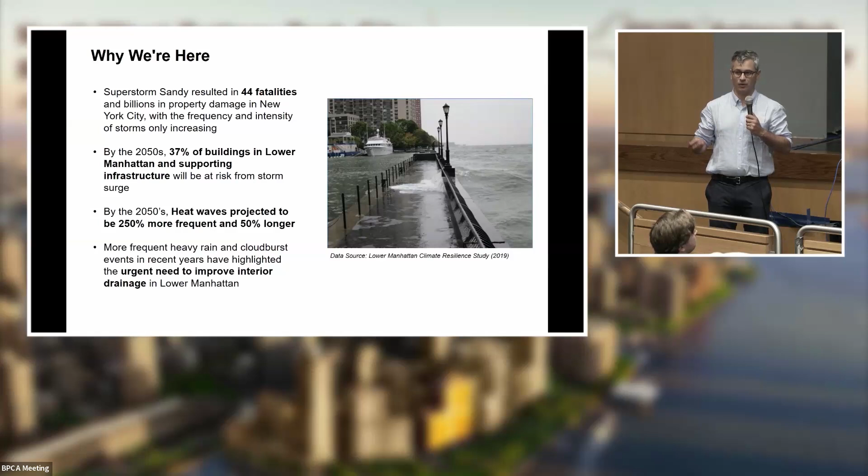So why are we here? I think most of you are pretty familiar with the recent history, but it's always important to frame this conversation with the urgency of the challenges we face. Everybody remembers Sandy quite well, but the risks are only growing, and we can see this with the wildfires last summer, with the heat today, with the heat around the world. Climate change is here. It's very real. It's impacting Lower Manhattan as we speak. We have to struggle to adapt, and not only adapt to climate change, but try to build a better neighborhood in the process. That's what we're all trying to set out to do today. And we also have to think about it not only in terms of sea level rise, but in terms of rain and extreme heat as other important factors in adaptation.

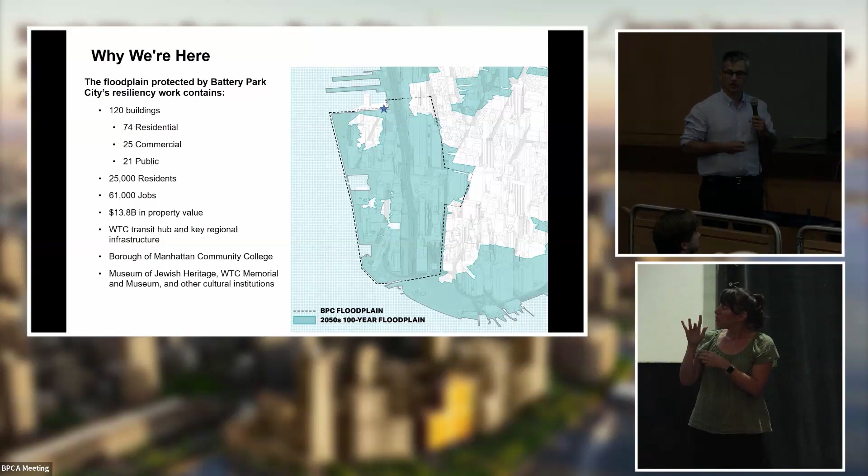So here's the snapshot of where we are today and what this plan hopes to address. You can see, with the numbers on the left of the screen, the number of residents here in Battery Park City, but also just east in Tribeca, 25,000 people, a significant collection of really important institutional stakeholders like the Borough of Manhattan Community College, the World Trade Center, the collection of buildings and the transportation underneath it, the Museum of Jewish Heritage, and on. So it's a hugely important part of the city's economy with an incredibly important collection of institutions we're hoping to protect. And it comes in the broader context of this effort that the city is undertaking, to look at Lower Manhattan as a connected set of coastal resiliency efforts.

I wanted to give a moment here for Jordan Salinger, who works for the Mayor's Office of Climate and Environmental Justice. I want to flatter Jordan for a second before he gets up to say that I think there are few people who have done more to protect Lower Manhattan's coastline than Jordan. He's one of the unsung heroes of resiliency work in the city. So I wanted to sing his praises and give a little more context on what the city's doing. Jordan, you want to say a few words? Let's give Jordan a round of applause.

Well, certainly the first time 'hero' has been in any introduction of myself, so I'll take it. Hi everyone, Jordan Salinger, Mayor's Office of Climate and Environmental Justice. As described, this is a partnership we've had with Battery Park City Authority for the better part of the last decade. Certainly planning efforts came after Hurricane Sandy, but in earnest really 2016 and on, working together on these projects. One quick note to explain the slides here.

Ignoring East Side Coastal Resilience, which on its own is a $1.5 billion project, everything below there is roughly $1.7 billion worth of capital projects in construction—roughly half of these efforts. The Brooklyn Bridge to Montgomery Coastal Resilience broke ground about a year and a half ago. More recently, the Battery Coastal Resilience, and obviously the work the Authority has done on the South project. So once again, $1.7 billion of funded capital projects. There is more to be done.

You can see the call-out there for FiDi and Seaport Climate Resilience. That is a more complicated effort we are undergoing, but something we've made steady progress on. I want to take a moment to focus on the collaboration with the Authority. There's nowhere else in the city where you have all these projects abutting each other. They all work independently and can advance independently, but for example, there's one drainage system. So it does require all of us working together, and they've been great partners, with the same design standards across the projects—that's no easy feat.

Also want to take a moment to thank all of you for coming on such a warm evening. There could be plenty of other places outside, but once again, the AC does seem pretty nice.

These efforts are not easy. They are long-term infrastructure projects. They involve real back and forth. There's no easy design solution, and like any infrastructure projects, they don't happen overnight. These are projects that will take a while to construct, but future generations will truly benefit from those efforts. That is not always easy in forums like this, but I appreciate all of you having the conversations and trying to make these projects better, because one thing we've seen over the last decade is conversations like these have led to better projects. So once again, thank you for having me.

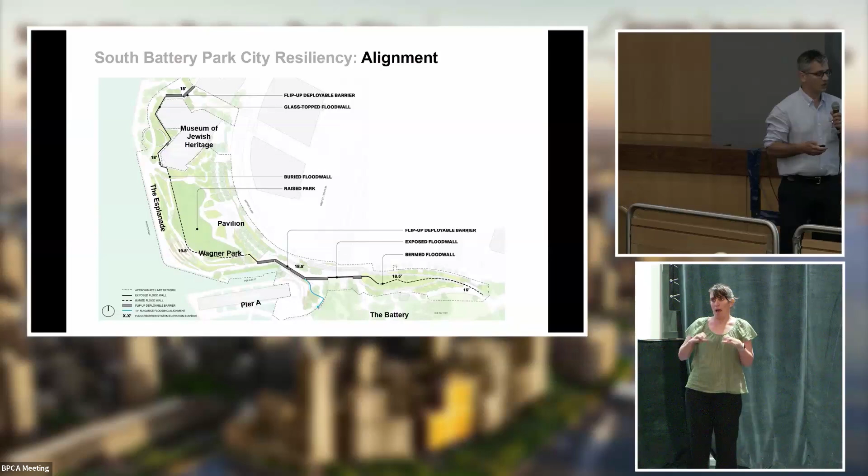This is the effort underway in the southern end of the neighborhood, as Jordan alluded to, stretching from the Museum of Jewish Heritage down through the Battery itself. If you walk by this neighborhood, you'll see the active construction happening. We've got some images here showing what's happening—you can see the pavilion building in the middle rising.

You can see the below grade work and some of the complicated and interesting engineering happening to really elevate the park and pull it out of the floodplain. We're excited to report that we're continuing to be on budget and on schedule, and by summer of next year, the park will be reopened.

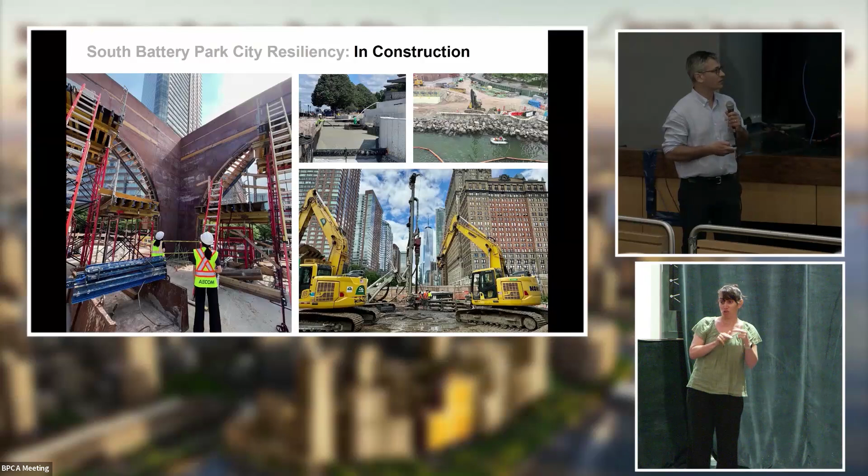Got a couple more images to show you about some of the really interesting and complex construction work that's happening, so hopefully those of you who are engineering and construction nerds can appreciate the level of effort and complexity happening. So that's just a quick update. Next summer, we hope to really celebrate with you all the opening of that park, and it's exciting to see it continue to move forward.

So the meat of the conversation, I'm going to turn over to Gwen Dawson, our Senior Vice President for Design and Construction, who's been admirably leading the Northwest resiliency efforts to talk through our updates to design. As Jordan mentioned, this has really been a great conversation with the community where we've tried to respond to concerns we've received and improve the design. I think you'll see some hopefully improvements in the design, and then also start talking about construction and what the schedule looks like. That's a much longer conversation we'll continue to update the community on, but I want to introduce the overall schedule and timeline so you get a sense of how that might play out. So with that, I'll turn it over to Gwen Dawson.

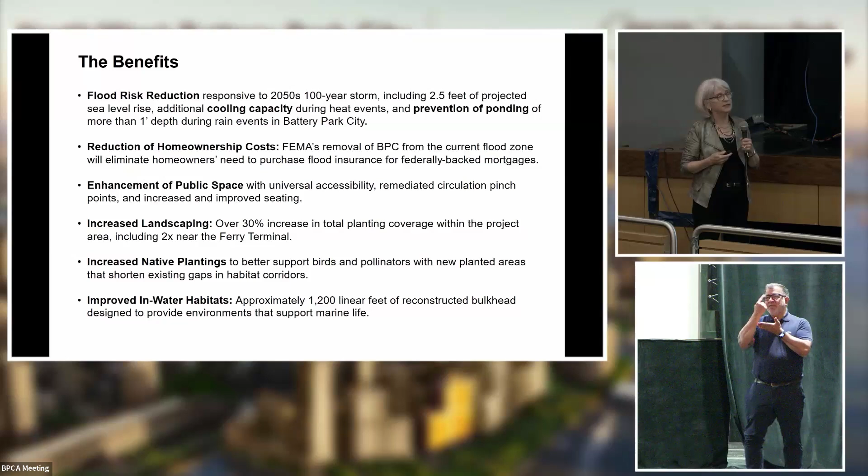Just to touch on some of the benefits, as you know, we are designing this project to be responsive to the 2050s 100-year storm, which includes 2.5 feet of sea level rise. We're also anticipating that it will help provide additional cooling opportunities for heat events, and also drainage advantages which keep the potential ponding and accumulation of water to a minimum in the event of heavy rainfall events.

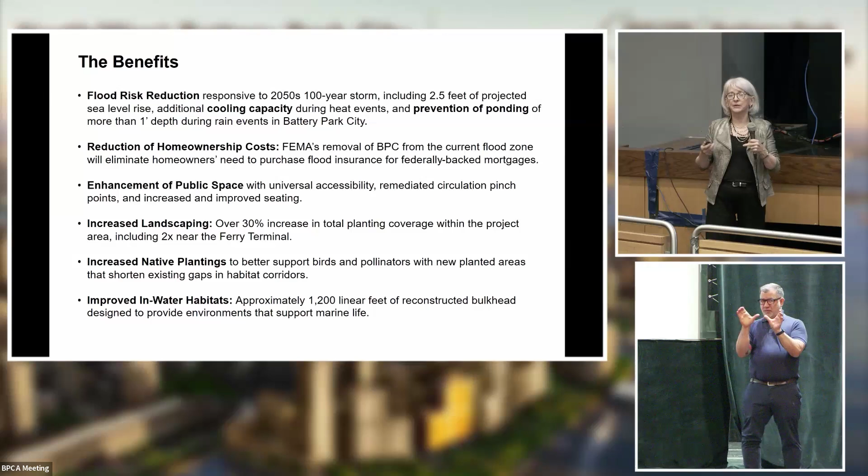We also want to make sure folks keep in mind that there are a number of economic advantages that flow from the project, not the least of which is that with FEMA certification, which is part of the project, the Battery Park City community will be removed from the FEMA flood maps, which eliminates the requirement for flood insurance for federally backed mortgages.

We also have taken every opportunity we have identified to enhance the public spaces as we design the flood barrier system, to increase landscaping -- something we've been very successful at doing, about a 30% increase across the project area in overall landscaping opportunities, increasing native plantings and also in-water habitats.

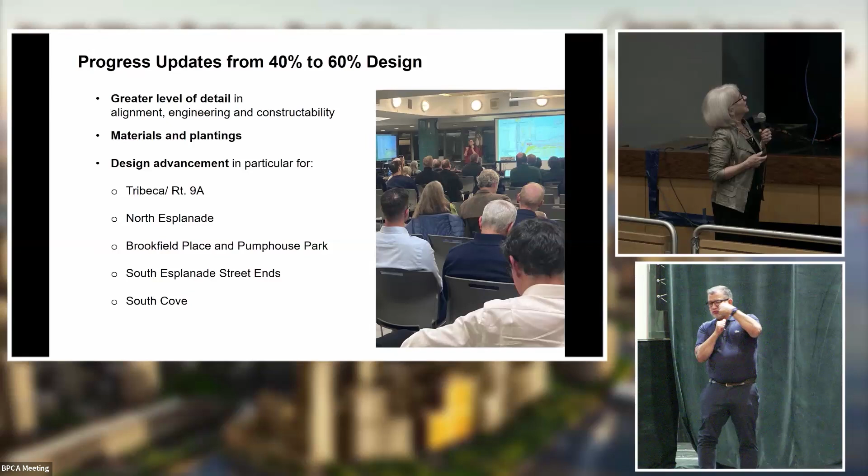Just to give you a summary of some of the design developments that have taken place since the last time we met: we've got a greater level of detail in the alignment, the engineering, and the constructability for the overall project area. We're also focusing a great deal on materials for the finishes and the planting palette. There have been particular advancements in the design for certain portions of the project, including the Tribeca Route 9A section, the North Esplanade, Brookfield Place and Pumphouse Park, South Esplanade Street Ends, and South Cove.

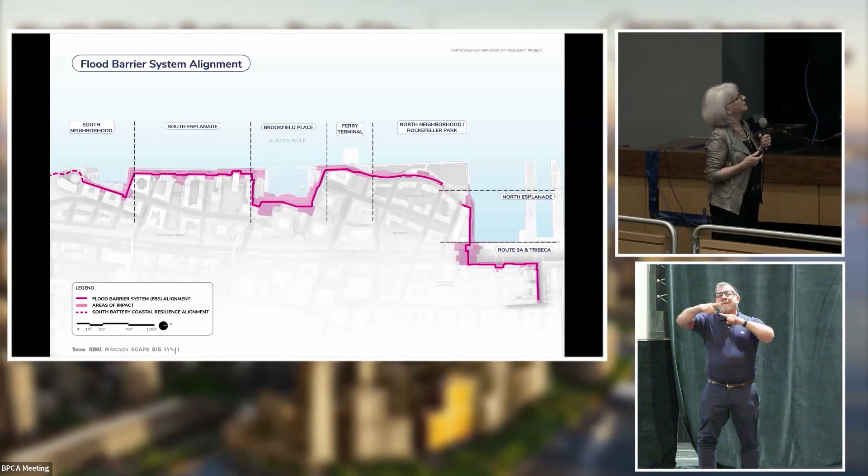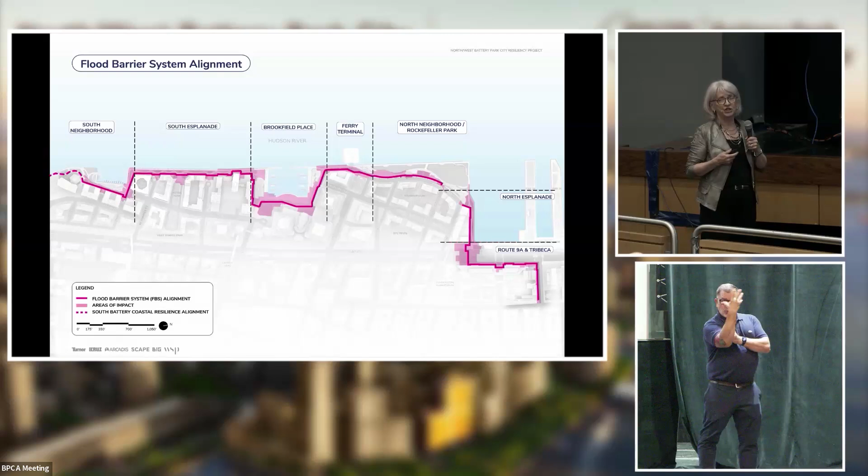To reorient you to the overall project area, it's a very long alignment, over a mile long. This slide is oriented so south is to your left, north is to your right. The project begins on the south end at the end point of the South Battery Park City Resiliency Project around First Place, then proceeds northward along the waterside edge of Battery Park City, across the North Esplanade, and extends across Route 9A, up the east side to North Moore Street, and across to Greenwich Street. We need to go that far, even though it's outside Battery Park City, because in order to achieve the targeted storm protection, or design flood elevation, we have to find a natural spot where the existing topography meets that elevation. There isn't a spot within Battery Park City itself where we could stop the project — we can't do that until we get across Route 9A to Greenwich Street, where the natural topography meets our design flood elevation.

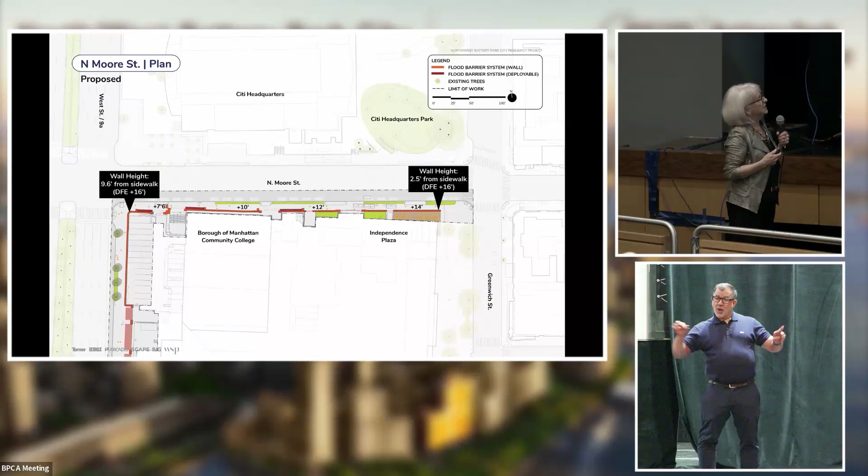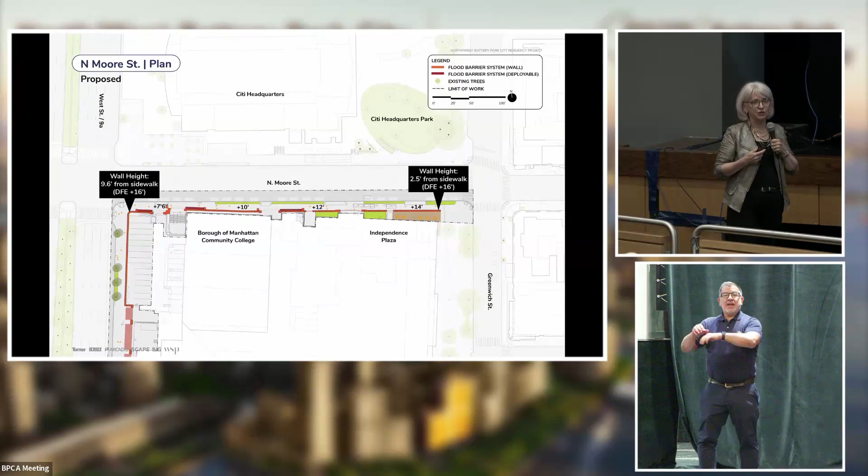Starting at that north end of the project area, the orientation here is east to the right, west to the left. You're looking at North Moore Street, with Greenwich Street on the right side of the screen. The project ends at that corner, where the natural topography achieves the design flood elevation. However, as the alignment proceeds westward along the southern edge of North Moore Street, the topography falls off and the elevation gets lower, so we have to pick up with a constructed flood barrier at that point. The flood barrier at the very eastern end is only about 2.5 feet from the sidewalk level, but by the time it reaches the intersection of North Moore and Route 9A, it has to be 9.6 feet tall to achieve that same design flood elevation as on the eastern end of the block.

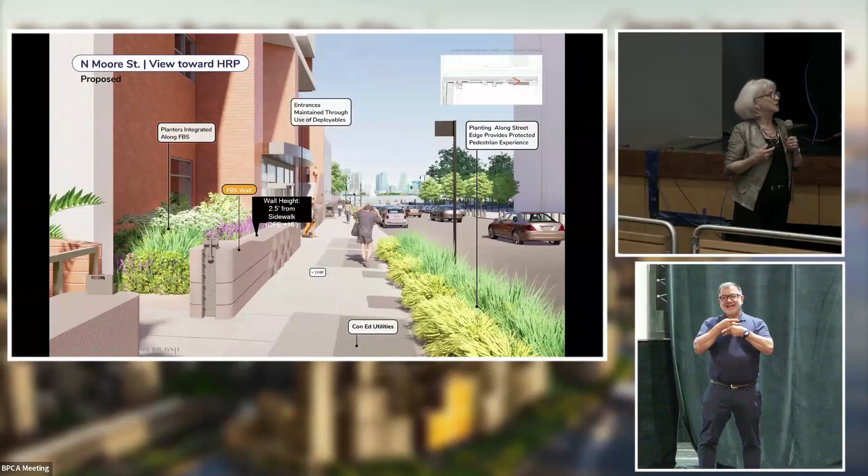This is a rendering showing how the flood barrier system will look upon completion. We're looking westward towards the water along the southern edge of North Moore Street. You can see the flood barrier on the left side of the screen. It's been designed to sit on the exterior of the building, hugging it in a way that makes it look like an intended extension of that building. There's no point in the project area where the flood barrier system is actually integrated within any existing buildings — they're very separate, but designed to be compatible. All entrances and exits to and from the buildings are maintained by deployable means: if there's no storm, it looks like this; if a storm event comes, a gate or, in this instance, stop logs would be placed in the gap to achieve a continuous flood barrier system.

We're going to change the orientation once more — north is to your right, south is to the left. North Moore is on the right side, and you're seeing the alignment as it proceeds southward along the Borough of Manhattan Community College on the east side of Route 9A. This may represent a change from the last time some of you saw this alignment, because originally the alignment in this section was intended to be on the west side of Route 9A, crossing just north of Harrison Street, then proceeding down the west side of Route 9A alongside the bikeway, walkway, and next to Hudson River Park.

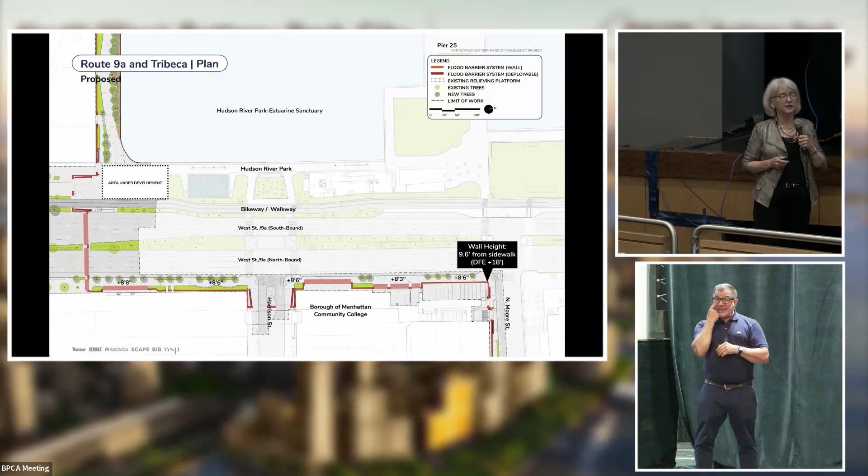What we learned in the course of design, as the coastal modeling was performed, is that the barrier required to achieve the design flood elevation was quite tall, over 9 feet, about 9.6 feet, which was a pretty imposing presence next to the park and the bikeway walkway. We looked at a number of different ways of trying to achieve that without being so imposing, including a partial passive and partial deployable wall, but there wasn't any way to reduce that impact, both visually and practically, enough to make that alignment work.

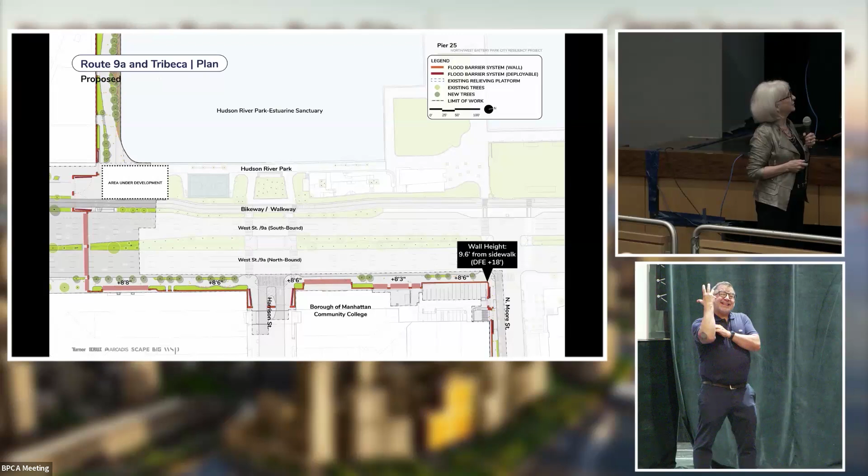So our design team went back and looked at a different alignment to bring it on the east side of Route 9A, where it hugs the exterior of the Borough of Manhattan Community College and proceeds southward from there. It does create the need for an additional street crossing at Harrison Street, which we're working very closely with the New York City Department of Transportation on.

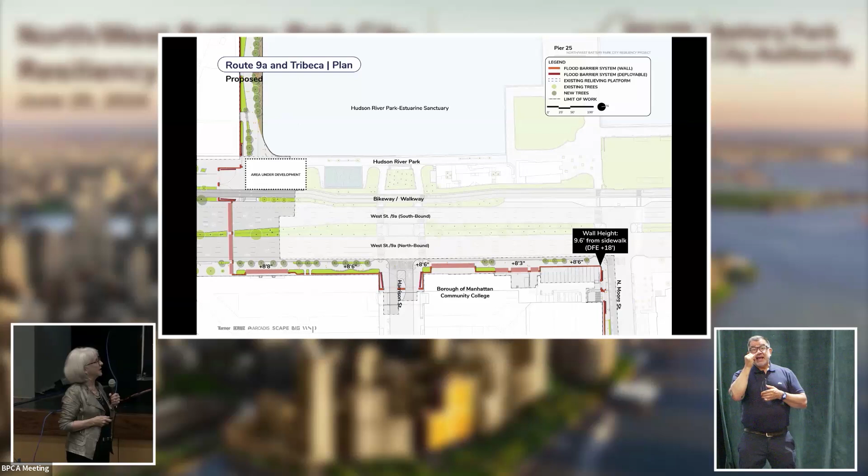Right now, the proposal is to create deployables in the form of swing gates that would swing into place in the event of a storm, but would not be in place during everyday operation. We're working closely with the Department of Transportation because the impacts on street operations and traffic have to be very closely analyzed, so we are awaiting a final determination on the acceptability of the swing gates in this location.

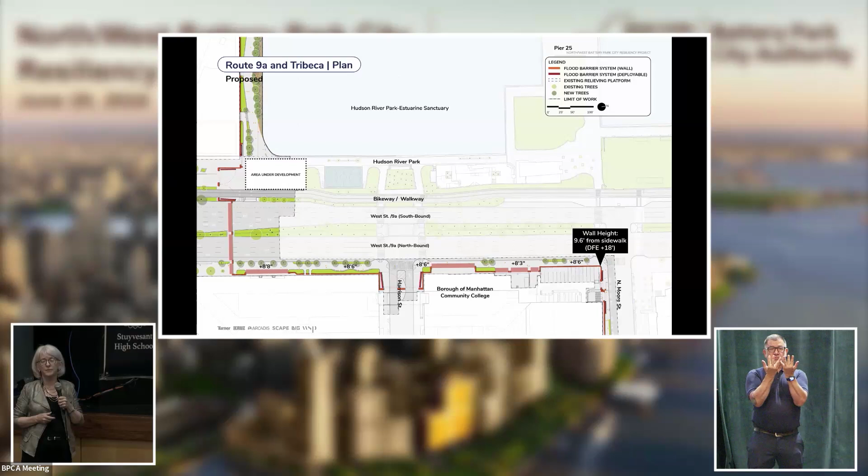And then as we go further down, as we cross Route 9A, we are confronted with the same challenge of what kind of deployable mechanism to utilize to cross that very busy roadway. What is currently proposed by our design team is a series of flip-up gates, which means that in their undeployed condition they would be flush with the roadbeds so they would not be visible to passersby.

However, we must make sure that solution is compatible with the overall standards, operations, maintenance, and traffic conditions that New York City and New York State Departments of Transportation are responsible for, so we are not yet in a final state of knowing exactly what that deployable mechanism would be. If flip-up gates are determined not to be feasible or viable, then the crossing there would likely also be swing gates.

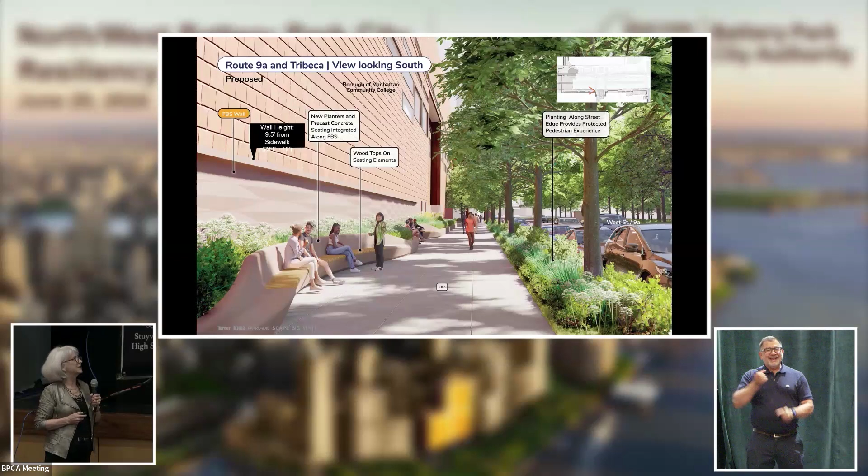This is a view looking down southward along the east side of Route 9A with the flood barrier in place. As you can see, this is the flood wall on the exterior of the Borough of Manhattan Community College facade. The objective is to make it look quite intentional and part of the overall streetscape. We are looking at opportunities for some significant addition of landscaping along this stretch, some additional seating opportunities, and some additional planting opportunities next to the roadway.

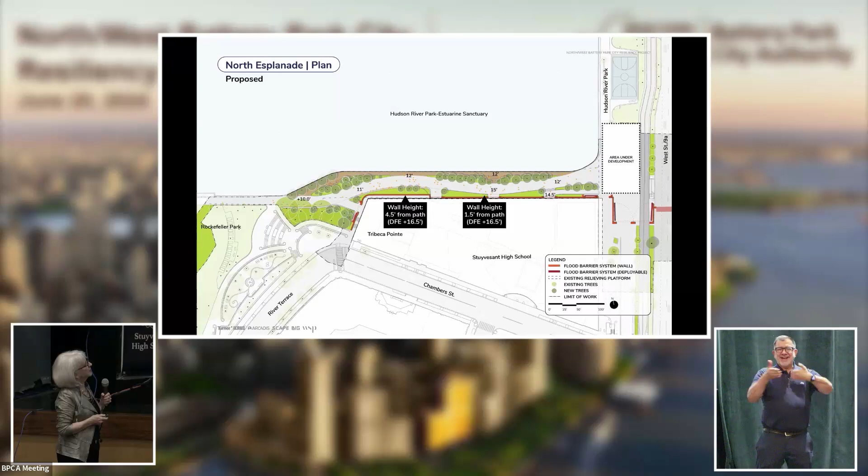As we then go into Battery Park City at the North Esplanade, east is to your right, west is to your left. This is the North Esplanade, which is right behind this building, Stuyvesant High School. So after we make the crossing of Route 9A, the flood barrier picks up along the exterior of the school building here. We have to replace this esplanade, the platform here.

And because we have to replace it, we're going to go ahead and raise it up, which allows us to make the flood barrier a little bit shorter than it would otherwise be. You can see right here, the actual wall height is only about 1.5 feet from the surface of the pathway, and next to it, it's about 4.5 feet from the pathway.

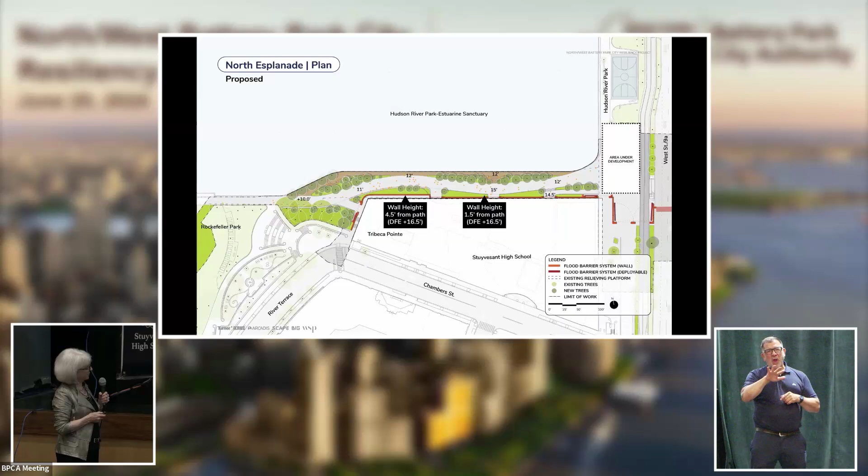We're also looking at, and we've presented to this group and others in the past, some other concepts for what we might do with this North Esplanade. There were some proposals to extend it in certain ways. I think there was a plan we called the Wave that some of you may remember, that varied in terms of some additional width we were looking at creating along this esplanade, to account for the additional space of the wall and the landscaping next to it.

But also to create opportunities for long-term adaptability. Adaptability is a very important aspect of this project, and it means that over time, we may learn that we didn't plan for quite enough elevation, or that sea level rise is a bit more than we anticipated, and we need to add another foot or two to the design flood elevation. So we want to make sure we are designing and constructing it in a way that we are able to achieve that higher design flood elevation without starting all over again.

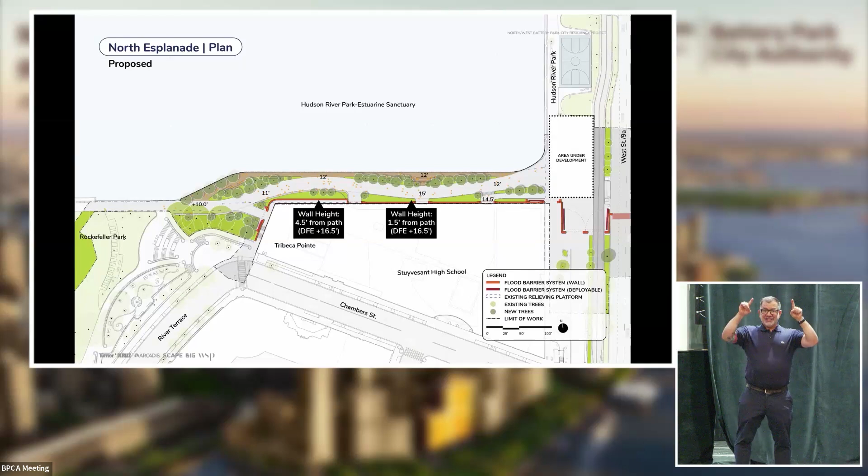So the extension of this esplanade by 6 feet, and the raising of the esplanade, allows us to achieve that adaptability over time, both in terms of wave attenuation, which is a very important aspect of flood control, but also the opportunity to create some other vertical element along the outer edge of the esplanade.

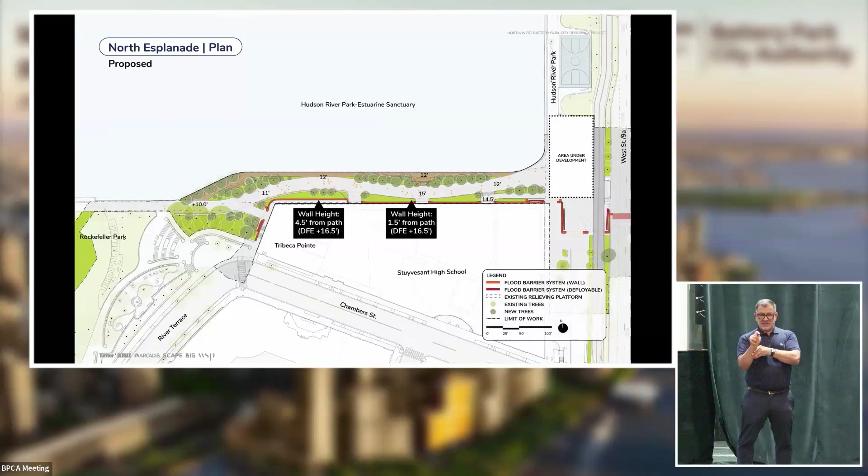In order to achieve that, the extension of 6 feet causes an encroachment of this esplanade into the Hudson River Park Estuarine Sanctuary. We have been working in very close collaboration and cooperation with Hudson River Park Trust on a means for addressing that and for achieving that.

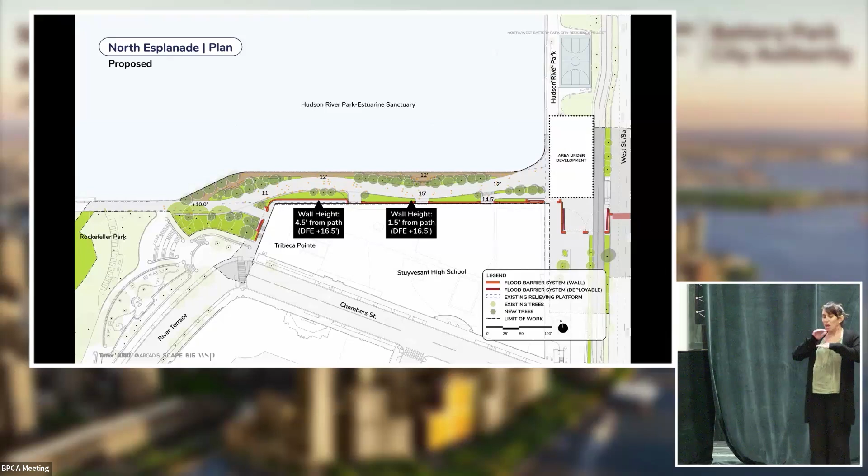It is a cantilevered extension. It's not at the water level, but it's over the existing water. So we are in cooperation with the trust, working on an arrangement which we think may wind up being some sort of easement that will allow us to achieve that extension.

I'll also point out that there's a curved connection here. Right now, that connection between the Hudson River Park and Battery Park City in the form of the North Esplanade is a pretty blunt, sharp right angle, and it's not a particularly friendly area. So the objective is to soften that a bit, to really ease that connection between those points. We think that's going to be a real enhancement to this area.

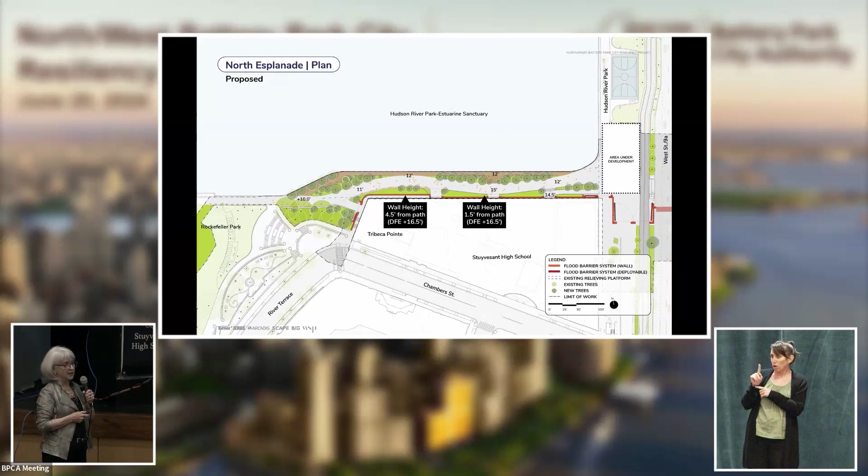I will note that the area on the right side of this is marked out as under development. That's because we're working very closely with Hudson River Park Trust on the appropriate types of finishes, lighting, and landscaping, and that's an ongoing effort.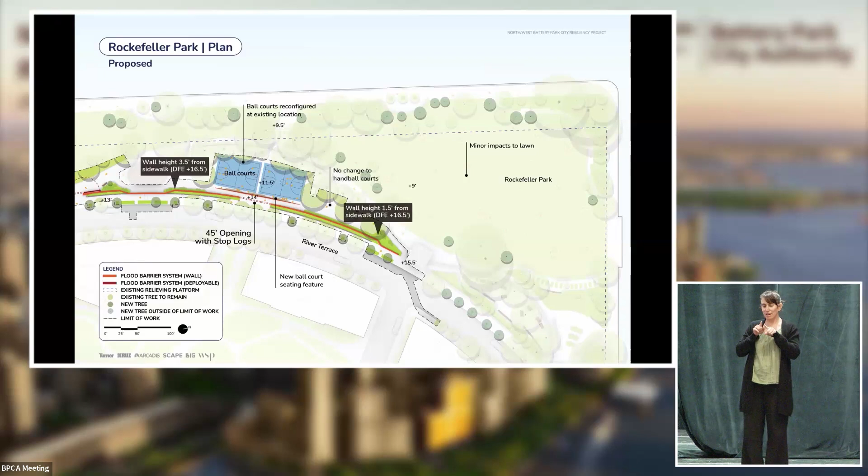I will point out an interesting feature here: at this area, you don't see a flood alignment. That's because this little area, which is near the Hurricane Maria Memorial, is actually at a sufficient elevation that the construction of a flood barrier is not needed. So we have a little area here where we don't have a constructed flood barrier.

I will also point out that, as we have said on numerous occasions in the past, the objective has been to maintain access to Rockefeller Park throughout the bulk of construction of the project, and we are continuing with that.

One of the things we have pointed out in the past is that we felt there might need to be some drainage and grading changes to Rockefeller Park, so there could be some minor construction impacts.

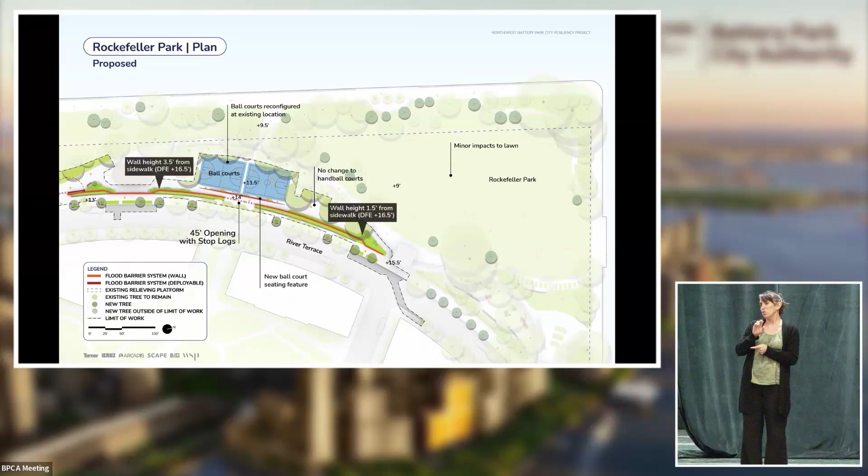What we have found since the last time we met with you folks is that we're going to add some drainage components, but we don't believe any regrading will be required. So that's good news — we won't be having to do that.

As we proceed southward along the eastern edge of Rockefeller Park and next to River Terrace, we have to start picking up the flood barrier line, and we're essentially following the same line as the existing stone wall along River Terrace. It's offset a little bit.

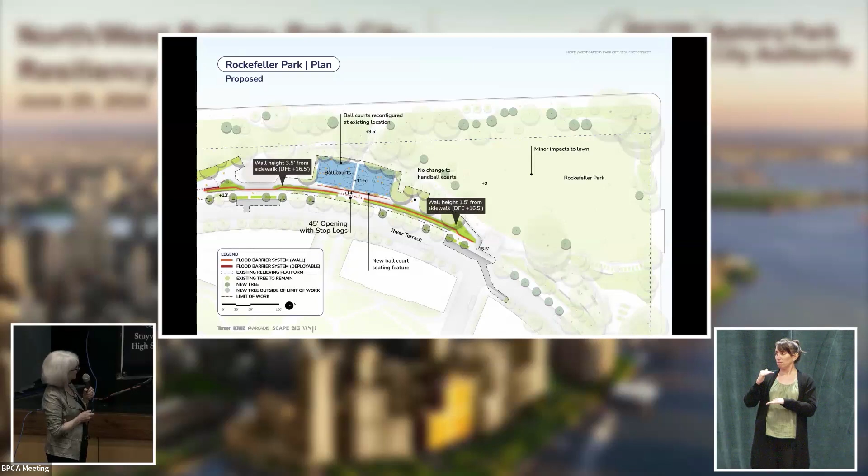It won't be right on top of the existing wall, but offset a little bit, which will allow for some additional landscaping on the east side, and will also allow a number of the street trees to be retained. The height of the flood wall at this point picks up at about 1.5 feet from the sidewalk. By the time we get further south, past the ball courts, it's about 3.5 feet.

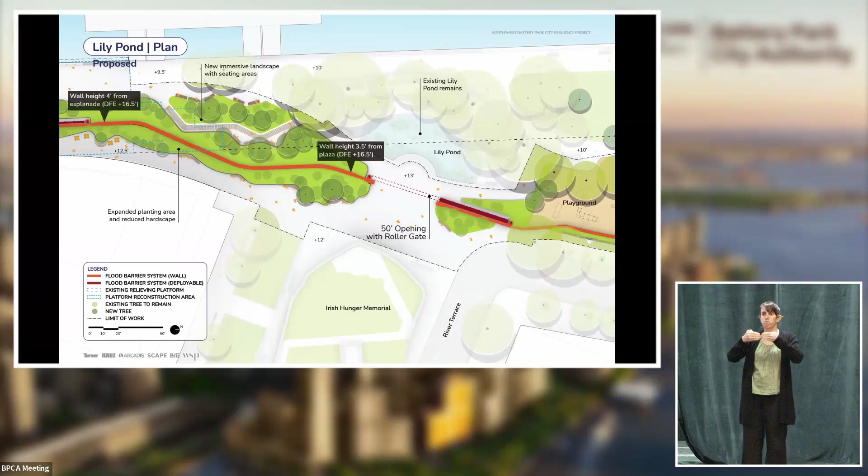For the area further south, as the flood wall is threaded through between the Irish Hunger Memorial and the Lily Pond, not much has changed here. We've got a deployable area here, which again, when the flood barrier is not needed, will be retained as pedestrian access with view corridors to the water. Then the barrier proceeds southward from there, but it's about 4 feet tall at that point.

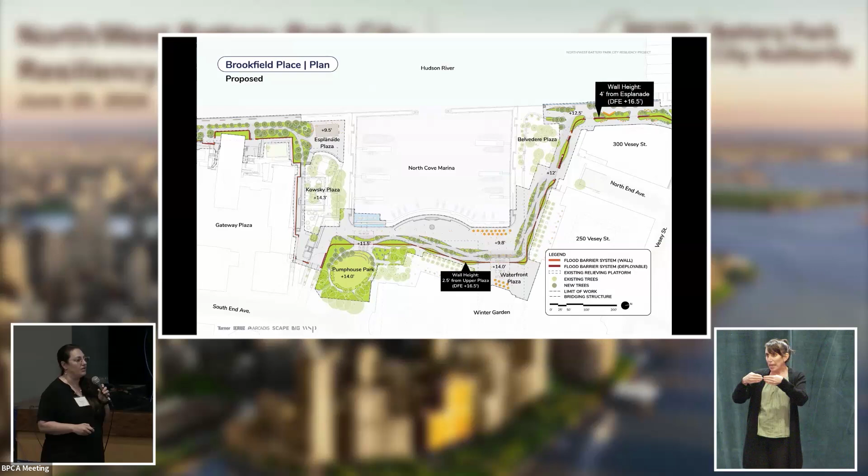We've also looked at optimizing the locations of the gates in this area so that they either align with where a lot of the building entrances are located, or they align with the street end here at North End Avenue, so that we're maintaining a lot of views from the street end into the marina.

You can also see as the flood barrier system wall comes down to Waterfront Plaza, you see this larger opening here. This is where we've located a series of deployables called stop logs, and these stop logs can be removed and stored, allowing for this really large throughway from this upper plaza area down to the lower plaza area.

In this area there's also a bit of a grade change from what exists there today. If you think about what is existing there today, you have these higher raised dining terraces, and then you have the pink granite art piece that steps down before you get to the lower plaza area. This is very difficult for people with accessibility issues to access.

As a response to that, we've introduced a series of switchback ramps that switch back between the upper part of the plaza and the lower part of the plaza at a 1:20 slope. A 1:20 slope is something that's very comfortable for somebody to get to just by walking. It's almost difficult to realize that you're walking on a 1:20 slope unless you're really paying attention.

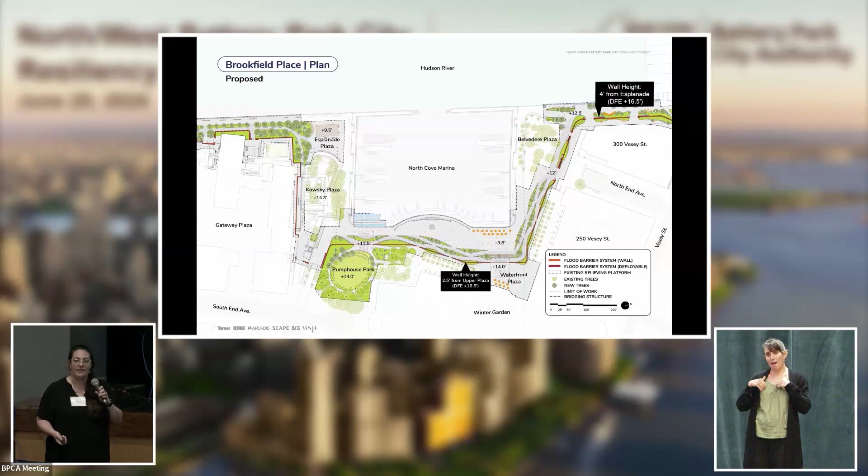Within those ramps, we've introduced a series of planters and precast benches to add some visual interest to the area. It's a way for us to add more trees, more vegetation, some shade, and some biodiversity. Underneath these planters, we have a series of precast benches where people are able to sit and face the water.

Another part of the design that is one of my favorite parts here is a series of stadium seating. This starts to piggyback on some of the original program happening there today. A lot of times you get classrooms that come into the area and sit, and they want to sit and look at the marina. You have book clubs.

You also have small scale music events that happen here, in addition to the larger events that happen in the lower plaza, where we've tried to keep a lot of that open space the way it is today so that those events can continue.

As we start to go around closer to Pump House Park, you can see that the wall is crossing the entrance to Pump House Park. And in this scheme, as well as with some of the tables outside, we have a couple different design iterations that we were hoping to get feedback from you guys on.

In the last public community engagement meeting that we had, we received some feedback about Pump House Park, both in terms of how some people wanted to open the park up. They wanted there to be more visible sight lines from the park to the Esplanade. And then we received some additional feedback from a different group of people that said, hey, we really like the way Pump House Park is today. We'd like to close it up. We'd like to keep it this kind of more urban oasis.

So after this meeting here today, please stop by the Pump House Park table. We would love to hear additional feedback from you guys.

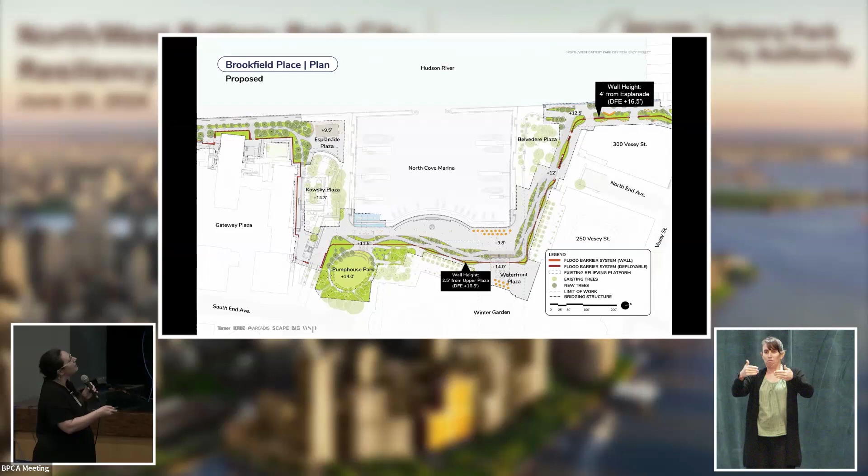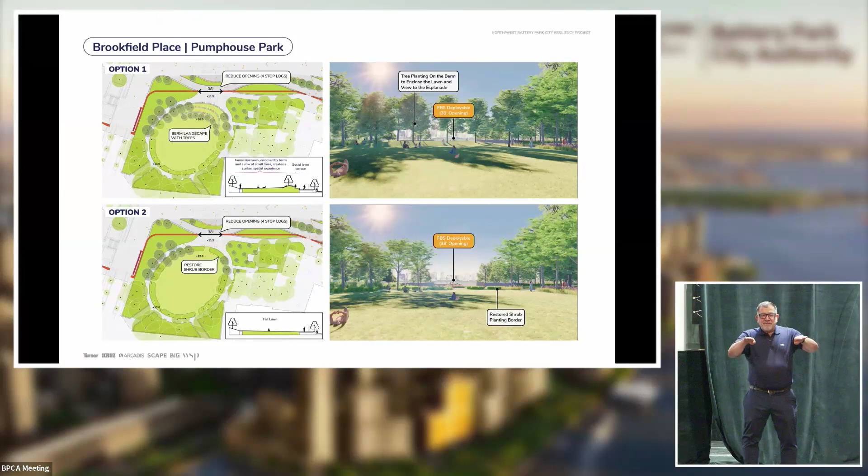And so now we're kind of turning the corner from Reach 5 and moving into Reach 6.

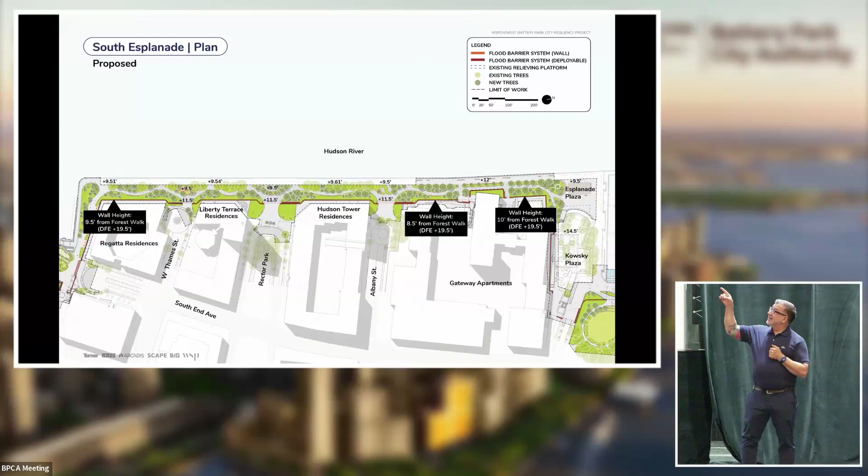A couple of the things you can see in Reach 6 is that the wall of the FBS mostly follows the line of the buildings down along the face. That's for a few reasons. First, we want to keep most of the space that's there now as public space. Second, it's much more constructible and much better practice to build the flood wall off of this raised platform that's over the water. So everything here on the outside of this flood wall that follows the face of the building is essentially on a platform that has water underneath it.

So you can see that the wall is replacing what is mostly a privacy wall that is there today. If you walk along South Esplanade towards the back behind the trees, you'll see that pink granite clad flood wall. The flood wall is going mostly in that same location, but it'll be 14 to 18 inches higher. You can see that from these little flood wall tags we've added in the presentation.

We're also proposing in all of this area to put back the World's Fair bench that you see there today. This is a big part of the Battery Park design vocabulary. We love them, we recognize them, they're kind of a New York standard design. So we'll be putting these back here in these little areas where they're pulled off of the path so that people have room to sit, while also people have room to walk in front of them.

And then you can kind of see these more organic clumps of trees with a lot of understory and a lot of pollinator plants that are a little bit different from what you see there today. What you see there today is a lot of low boxwoods and low, very manicured shrubs. You don't see a lot of these mid-level understory plants, and then you have these very large trees. In order to meet our biodiversity and ecological goals, we wanted to provide more habitat and more biodiversity in these areas.

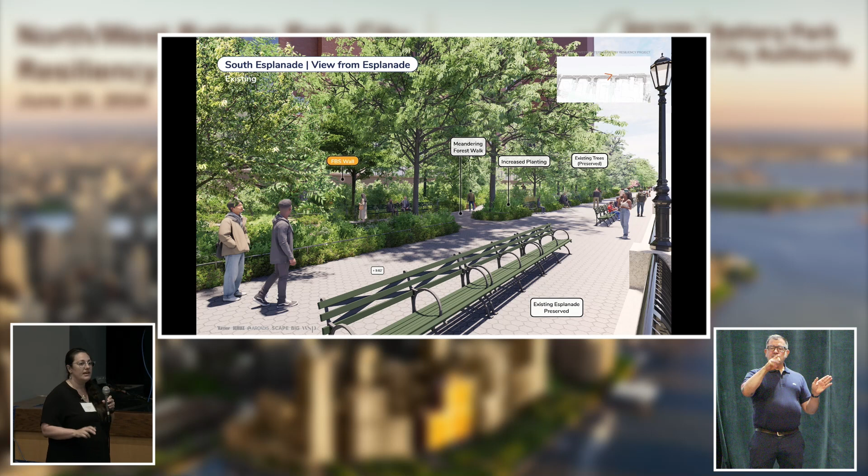This is a view from the Esplanade. Again, everything following this line out towards the water is what is there today, and this is going to stay. This is really a main thoroughfare - you see a lot of bikers, a lot of joggers. My favorite are the little kids at the preschool who are all tag-teaming on their little hand-holding ropes. So this is staying the same, and this is where these little secondary paths are coming out through this thick understory and down to the primary Esplanade.

So this is starting to look at the 3 different street end nodes. Within Reach 6, we have 3 places where the streets come through and terminate into the Esplanade: West Thames, Rector Place, and Albany Street. In each of these street ends, we've proposed a different type of program for people so that they have a different type of space to congregate in off of the Esplanade and off of that secondary path.

The idea of these spaces is to have a place for more informal gathering - an informal opportunity for people to sit and read in the shade, or to sit and look out into the water. One of the big pieces of feedback from the last community engagement meeting was when we asked what people really want to do in these spaces. People said they just want to sit in the shade and look at the water. We also had a lot of moms say they want a place to sit with their strollers. So we started to look at these larger seating opportunities and what that means.

At the first street end, which is Albany Street, we've proposed what we call internally the yin yang - two smaller areas with semicircular benches, one slightly higher than the other. Both have very nice views to the water. They've been designed so that when you're sitting in the higher level room, you can see underneath the vegetation out into the water. In the lower level room, you have a bit more protection by shade trees that'll provide some shade in this more enclosed area.

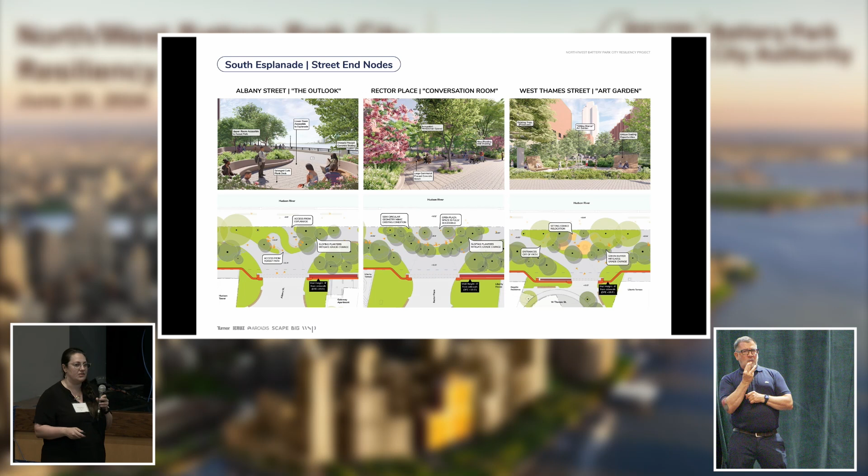The great thing about West Thames Street today is there's an art piece called Sitting Stance that is much loved by the community. Some of the feedback we received was, we really like Sitting Stance and we don't want to see it removed from the project. So we received some direction to start studying whether this could belong in the street end node here.

We actually found that each of the pieces fit pretty perfectly, and they provide these weird, interesting, different design opportunities for people to sit and climb on the furniture and look out to the water. So that's what we've gone with in this last node.

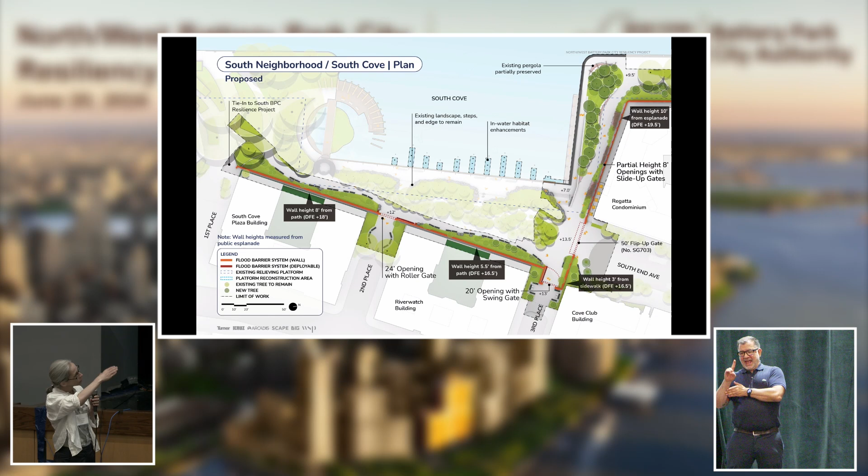Moving inland from the Regatta, the flood wall turns the corner near the Cove Club building and continues south alongside the existing privacy wall. In this area, the existing privacy wall remains and the flood wall is built just outboard of it, so we're not impacting any of the existing courtyards associated with the Riverwatch building and the South Cove Plaza building. The height of the wall here varies quite a bit.

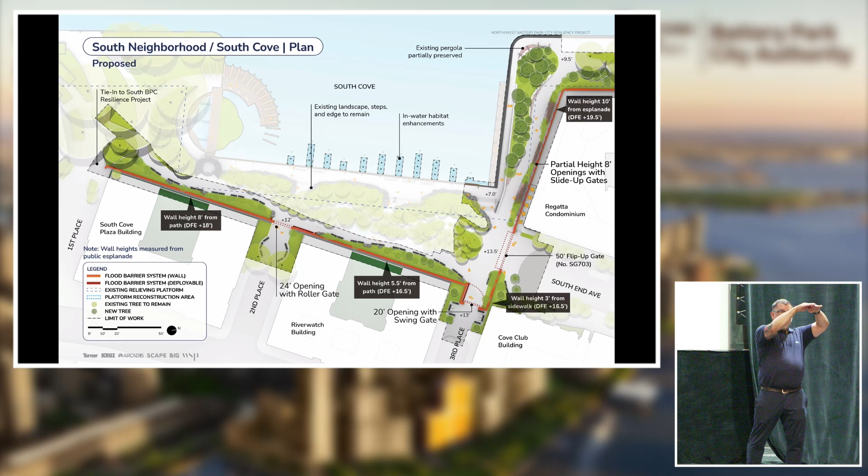Starting at the corner near the Regatta, the wall is fairly high. But as we go further inland toward Third Place, we can lower the elevation of the wall because we are farther away from the water and subject to less wave impact.

And then finally, on the south portion, just immediately south of the South Cove building, we are tying into the South Battery Park City Resiliency Project, which continues from here and protects the rest of Battery Park City.

A few other things to note: along the Regatta, we have partial height openings in the wall to maintain some views and air circulation between the building courtyards and the Esplanade. Those have deployable gates as well that slide up into place in advance of a storm.

In this area, we've heard a lot of really good feedback specifically about the corner pergola. So we are preserving a portion of that pergola, the portion that faces the water with the benches, so people can still sit in the same location and have the expansive views out into the harbor. I should note that during construction, the pergola will be removed, but then reinstalled in that same location.

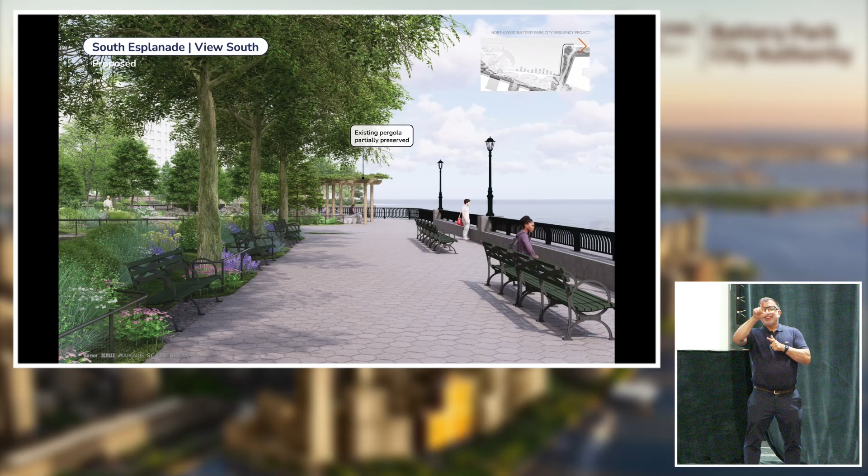So we have a view here looking from the South Esplanade south, and you can see the portion of the pergola being preserved with the vines, with the benches overlooking the water. Again, as Rachel noted, the existing World's Fair benches remain in place, so that edge experience is maintained as it is today.

I also have the job today of reporting back from some of the conversations we've had out in the hallway. So I'll start with the table that was focused on tree impact. Let me just get my notes.

So there is obviously a lot of heartache around the loss of trees in this area. If you've been coming to these events for a while, you know I share that pain. We've heard, well, I will also say it is extremely powerful right now in this moment with the heat dome that we're experiencing.

And of course, if there was a way to do this project where we could protect Battery Park City and Lower Manhattan from storm surge, from wave impact, and from heat all at the same time, I promise you we would do it. Unfortunately, in order to protect from the first two, we do have to impact and remove some of the existing trees. We are working very hard, the entire project team, to minimize that impact and to remove as few trees as possible and to plant as many trees as possible. We are planting more trees than we are removing.

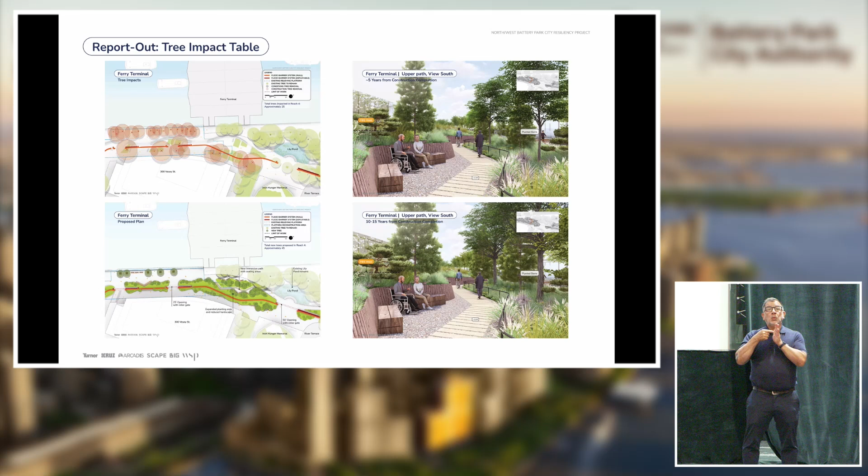We do have more detailed information at the tree table for each of the reaches, which trees are being removed, which are staying. We also have views, and you can see an example here. This is something that we've heard requests for a number of times. So we're showing views of the proposed condition at about 5 years from the completion of construction, so you can see some of the trees that are younger. And then on the bottom, it's 10 to 15 years from completion, so you can see how the existing trees grow as well. We have one of these for each of the reaches. Please come and look at them.

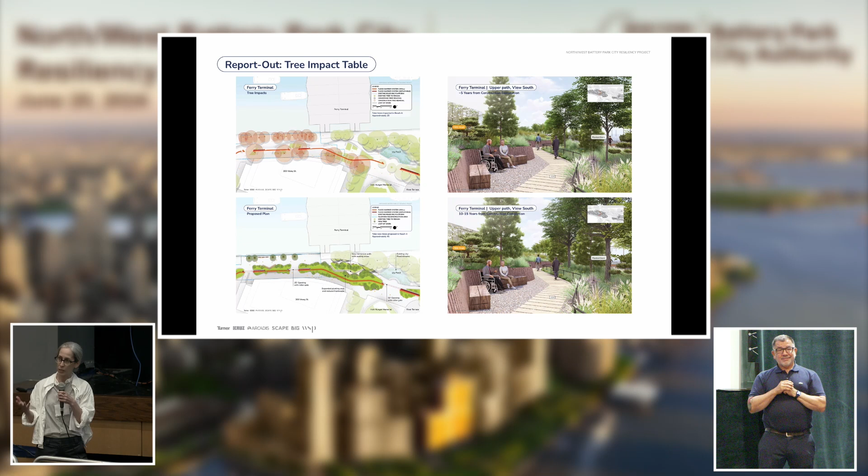We've had a lot of conversations today in this reach, especially at this table, on the South Esplanade around Gateway. As Gwen mentioned earlier, there are areas where we do have to replace and elevate the platform. That is kind of a necessity of the project. It does have a significant impact on trees in this area as well.

Right next to the tree table, we also have an area that's focused on green infrastructure and habitat and biodiversity. So we're showing some of the green infrastructure strategies employed in the project, including pervious paving and high capacity, high function rain gardens, which we are very excited about.

The other half of the story here is habitat and biodiversity. We're actually very fortunate to have a lot of data and analysis that BPCA has already developed that is guiding the planting strategy of the new trees and new planting that is going to be developed as part of the project. So we're looking at the diversity of ages, sizes of trees that we're planting, species, and really working to maximize biodiversity and habitat value for the new landscapes being created.

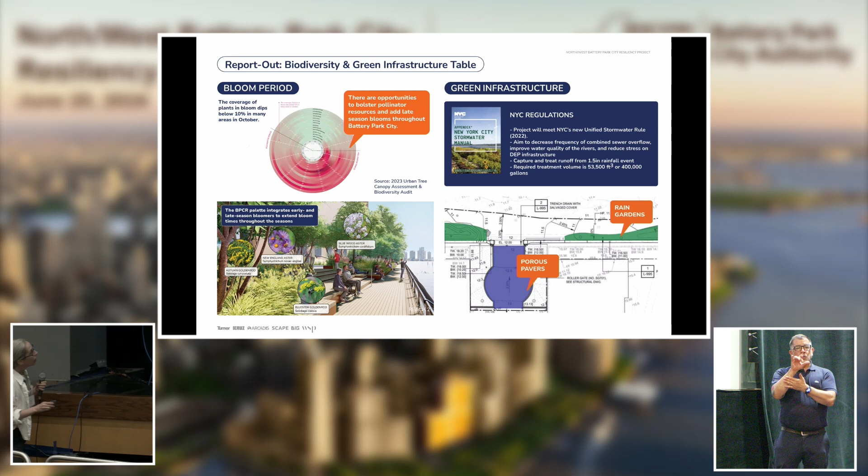Finally, we have an area looking at the proposed material for the flood barrier wall itself. This is the first time we're introducing this. What we're showing here is an integral color concrete that has a pattern created by a form liner. This is something we're still studying, and you're seeing the first iteration of, and we're really looking for input and feedback. We have heard that folks want to see a sample to understand what the material would feel and look like. That is great input.

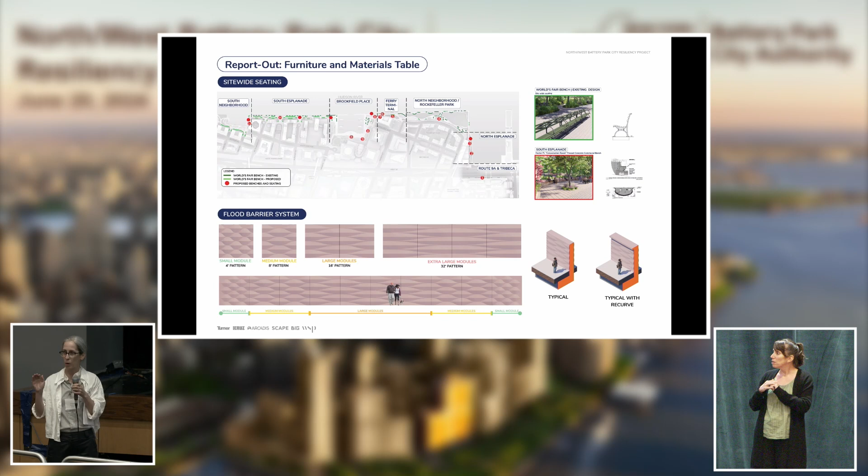Again, I would invite you to continue the conversation once we're done with the presentation here. We are also showing the range of special benches or seating opportunities, materials in general that are being proposed as part of the project. We have heard here that there is a lot of appreciation for the existing palette, these World's Fair benches, the pavers, the rail.

I just beg your indulgence for another little bit because we're going to change topics and talk a little bit about construction. I think there are a lot of folks who will want to hear, and I'll try to do it as quickly as possible without rushing too much.

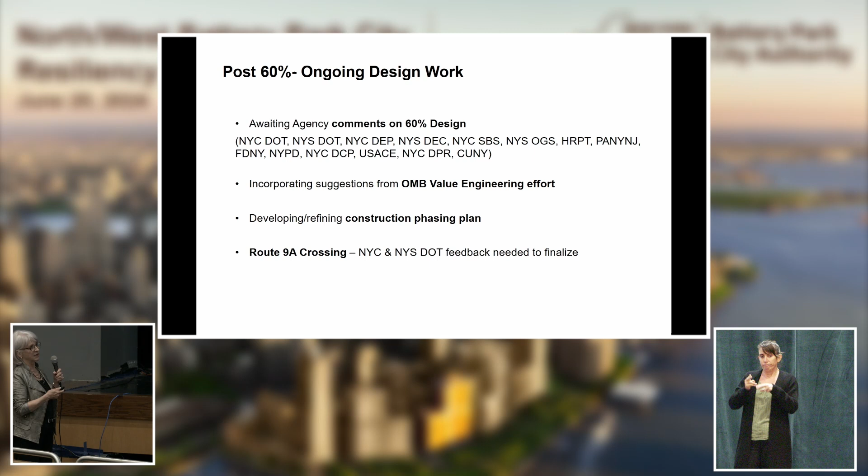Just to go forward, we've got some additional design work that takes us from 60 to 90%. There are a number of things involved in that, I'm not going to spend time on that right now. I do want to mention briefly one of the project elements we haven't really featured in terms of design at this point: the addition of a pump station required as part of the drainage plan for the project. This is a project element that came into being farther into the project, as design was developed and as interior drainage modeling was done.

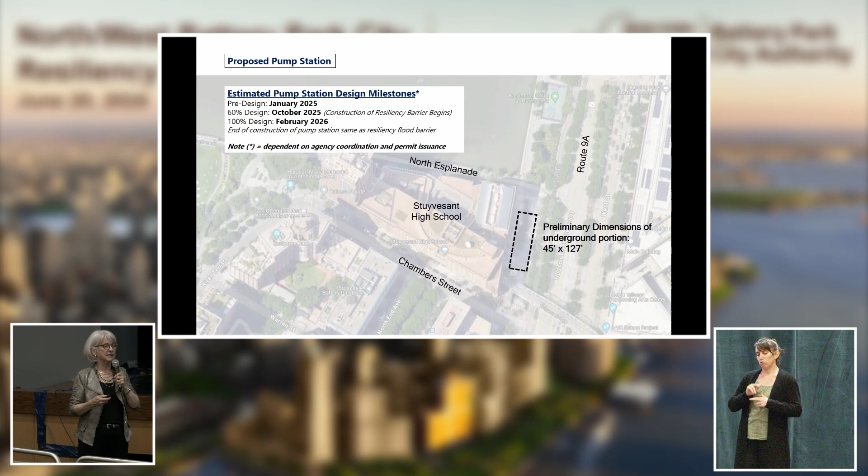Just to point out, the location of where we anticipate that being is in the plaza just east of Stuyvesant High School. It will be largely underground. So although there will be construction impacts, once it's completed, it will be largely underground with limited surface expression.

That surface expression is limited to some electrical components and some venting equipment. That project element is part of the project, but because it started later, it will have its own design timeline that we anticipate will run from January of 25 through February of 26. It will begin construction later than the rest of the project, but we anticipate that it will be completed at the same time.

Okay, so now we're going to switch gears and talk a little bit about construction, because it's only been in the past several months that we've had enough information about the design to be able to really start formulating some strategies around construction and the construction phasing for the project.

Just to talk a little bit about the objectives that we have, we want to be able to complete the project as quickly as possible with as limited disruption as possible. And that allows us to avoid delay in achieving the flood protection that we're trying to achieve. Every time June rolls around and a new hurricane season starts, we are feeling that we are operating on borrowed time.

So we want to get it in place as quickly as we can. We want to shorten the overall duration of the construction impacts to the community and contain project costs by avoiding unnecessary cost escalation, because the longer the project goes, the more it costs.

We will be beginning construction of the Northwest project after Wagner Park has reopened in the South project. That's something that was important. We want to make sure that we have that public space, that park, available and accessible before construction starts in earnest on the Northwest project. So aside from perhaps some limited utility work or some early work that's very limited in scope, construction will not begin until after Wagner Park has reopened.

We want to make sure that we've got open spaces throughout construction. We want to sequence the construction to accelerate protection of the highest risk areas first and to allow for continuous stretches of space that can be reopened earlier. And of course, very importantly, we want to maintain very close and very open and regular communication with the community throughout construction.

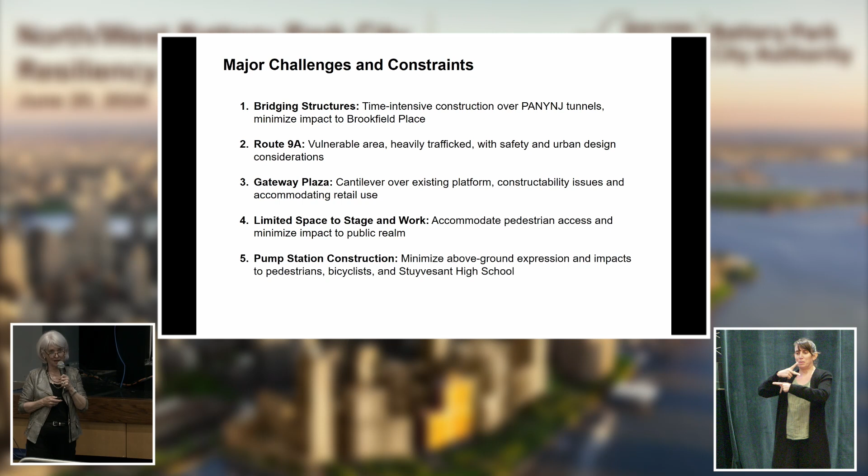We've got obviously some very significant constraints and limitations on the project. One that I will mention, because it does impact directly the duration of the project, is the bridging structures that are required in the Brookfield Place area, because that area underneath has an enormous amount of utility work, and also is the location of the PATH tunnels that are operated by the Port Authority, with the PATH trains into and out of the World Trade Center. So we have to bridge over those tunnels in a way that allows us to maintain a continuous flood barrier system, and that is an extraordinarily complicated endeavor.

The overall construction duration that we anticipate for the project is approximately 5 years. Again, that's based on the information that's available to us now. That may change a little bit, and we expect it probably will between now and construction commencement, but that's our best estimate at this point, and that is driven largely by the duration of the Brookfield Place area. That area in and of itself will take about 5 years to complete because of the extensive amount of complexity involved.

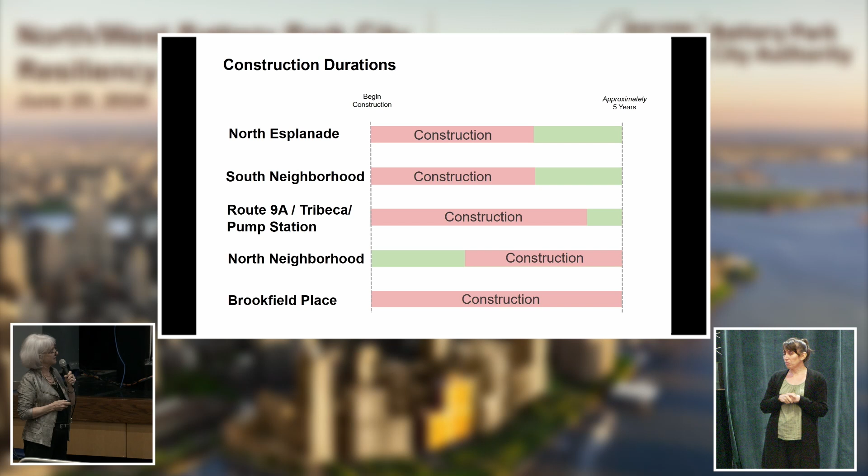As you can see, the other portions of the project don't take that long. There are some areas that we are looking at starting earlier, and some areas that we're putting off and starting a little bit later so that we don't have everything under construction at the same time.

Why are we starting at these locations? Well, we're starting at Brookfield Place because that is the longest duration, so we need to start there in order to be able to finish within that 5-year period of time. We're starting up here the North Esplanade and around Tribeca because that is the area where there is the most immediate vulnerability.

For those of you who were around during Superstorm Sandy, you recall that there wasn't as much flooding on this side of Battery Park City as there was on the east side. That was because the two lowest points adjacent to Battery Park City are at the south around the Pier A area and at the north right behind where we are now, at this corner. That's where the area was breached by floodwaters that ran down West Street. So we want to get this area protected as quickly as we can.

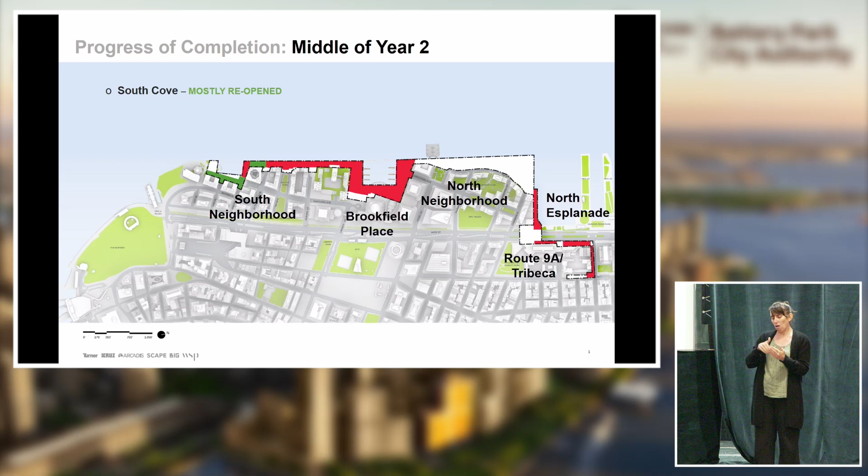In the middle of year 2, we are actually starting to already see some things reopened. Down around adjacent to South Cove, we've got this area reopened and a portion of the South Esplanade reopened as well. We have the rest of it under construction, as well as all of Brookfield Place and the majority of the area on the north end of the project area.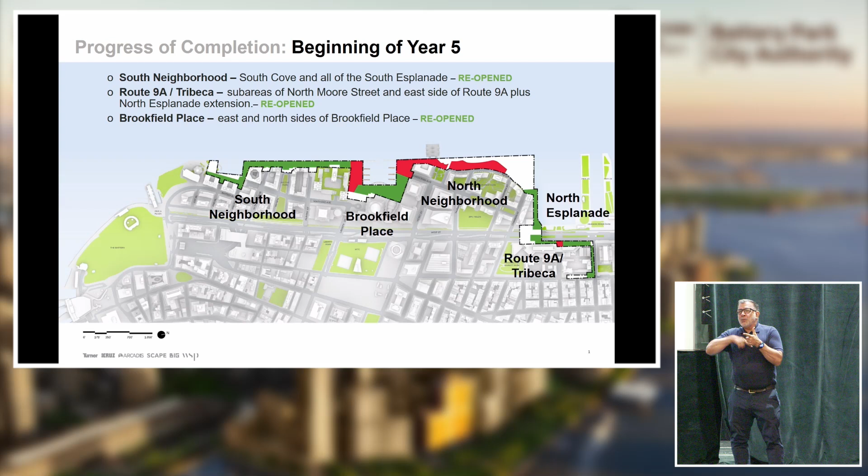At the end of year 4, we've got all of the South neighborhood, a significant portion of Brookfield Place, and the North Esplanade and Tribeca area opened. You'll notice this is the point at which we begin construction in the North neighborhood. Up until now, there hasn't been any construction that's actually begun here.

And then at the end of year 5, we've got everything reopened. I wanted to highlight that during the course of construction, there will be a lot of open spaces and parks that will be accessible. You can see from the south here at the Battery, that will reopen, and we'll have Wagner Park, Rockefeller Park, and a number of other open spaces and parks accessible both within Battery Park City and in areas adjacent to it.

We have a very strong commitment to ongoing communication during the course of construction. We will have a structured setup for how we maintain regular communications with the community, and we'll provide frequent construction briefings and resources available for continuous updates for the community during construction.

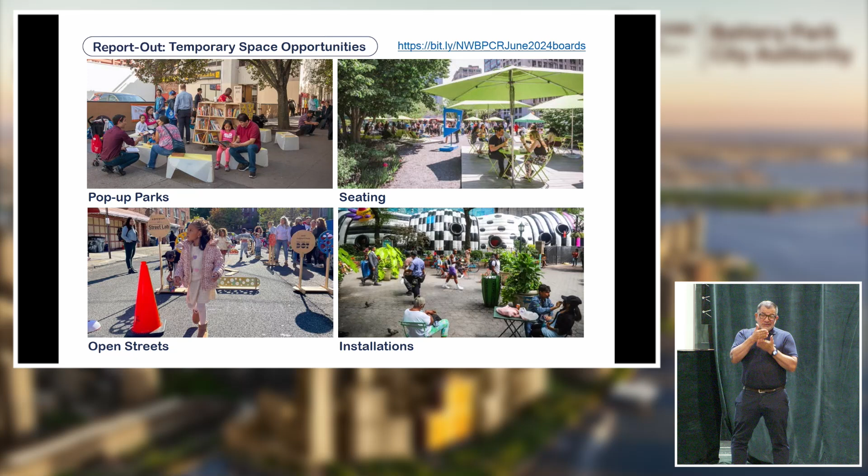We'll mention that one of the tables out in the foyer relates to the potential for some different uses of temporary open space during construction. We know there will be inconvenience - there will be some areas that won't be accessible for a period of time. So we're interested in hearing any ideas you have. We've got some maps outside, and we'd like to understand if there are things that may appeal to you, or seem like good ideas with respect to events or programming or ways we could utilize existing spaces to allow for more opportunities for enjoyment of the neighborhood.

This feedback will continue to be sought and solicited for the next couple of months. There will be an online opportunity for you to continue to weigh in with ideas on this up until Labor Day.

We will be continuing to have smaller meetings and one-on-one meetings with the buildings, owners, management, and residents of buildings along the alignment. There are 17 of them located along the proposed alignment, so we will be having conversations and opportunities for interaction with all of those buildings in the coming months.

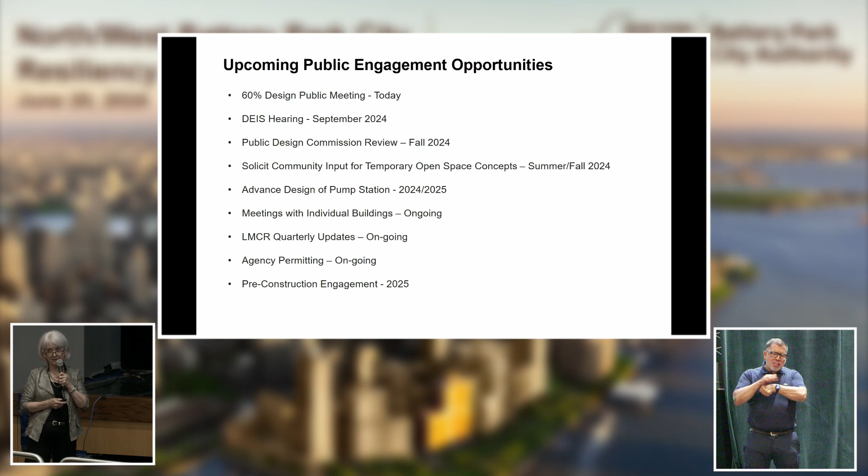You'll have plenty of additional opportunities for public engagement. This is not the last time you'll be asked for feedback on certain points, nor will it be the last time you'll be able to weigh in, see, or interact with the project as it proceeds through a number of different stages into '25.

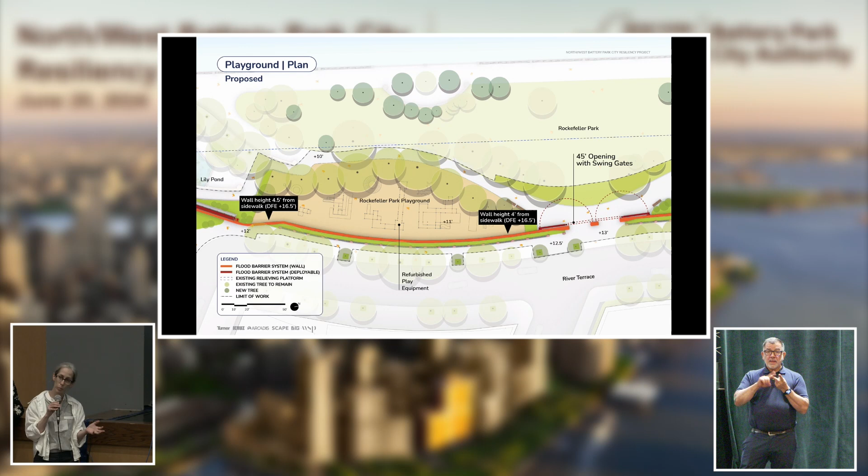The ones I'm familiar with include a couple of hippos, water elements that are part of the existing stone wall, and a dodo bird that is also an art piece and water element. Specifically, the dodo bird has some safety concerns with putting it back in place, so we're looking at opportunities to find a different location for it and to see if it still makes sense to have it operate as a water feature or not. The stone and concrete water features, the hippos attached to the wall, we are working on finding a place for them within the playground. It may not necessarily be the exact spot, but they will be retained as part of the playground experience.

Thanks very much. First of all, I think it was an excellent presentation. I really thank you, it was great to see that overview of the entirety of it. It was really, really helpful. And I'm on the community board, I know you, and it's really, really important to see the whole. I have a question that comes up a lot.

The community is very concerned about the west side of Manhattan. I'm curious, with everyone in the room that is involved in this design, how you feel you'd like to see the plans you've created inform the Army Corps, who is now, as we understand it, solely responsible for what comes ahead. How, in fact, what kind of conversations have you had? We've talked about this before. You've done this extraordinary work, and it's a wall system not completely dissimilar to what the Army Corps has provided. How would you like to see us go forward on the west side, assuming, for example, you get that commission?

Thanks, Alice, it's a very good question, and I know it's something that's been on a lot of folks' minds, because we recognize there is a need that exists north of the endpoint of our Northwest project. We understand that with the HATS study the Army Corps has worked on, there's some question and uncertainty about that, and some dissatisfaction with some of the concepts that have been put forth.

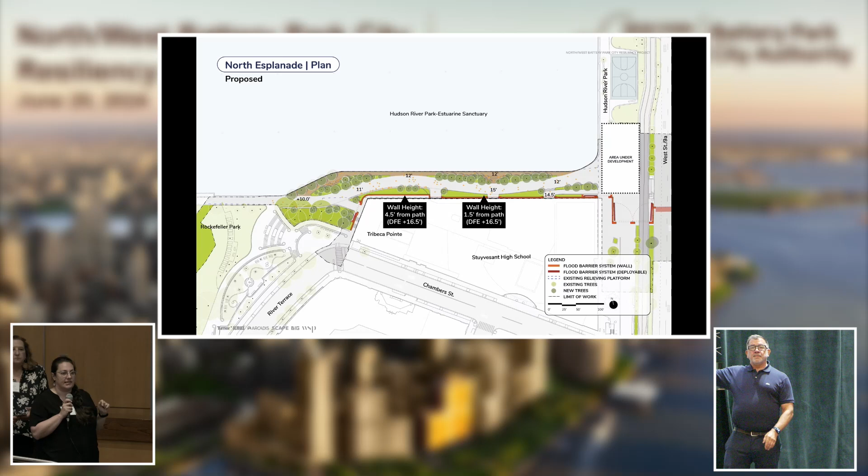Hello again, my name is Rachel. We're talking about the Reach 2 pathway. We're actually proposing two different pathways in this scenario. The current clearance of what is there today is 14.5 feet; we're increasing that to 20 feet. In general, that is the minimum width of what we consider the multi-use path across the project, a minimum of 20 feet wide, and a lot of areas existing there today get much, much narrower than that. In addition, we have an additional 6 foot wide back-of-rail walk that goes along where it's being rendered in wood in this image, so there's going to be a total of 26 feet of walking space. One is this faster, wider path with the micromobility, joggers, and then the slower, more ambulatory path closer to the water.

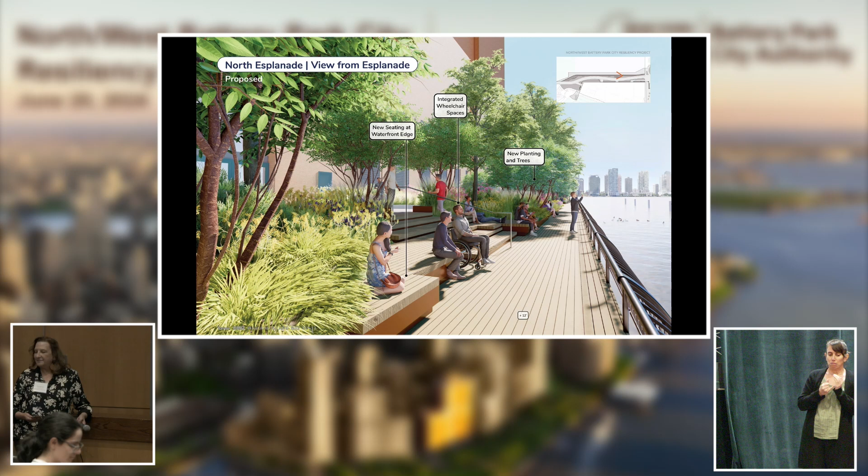So I have two questions, they'll be quick. On the trees, we were talking about it before. Someone mentioned they're going to try to do 3 to 4 inch diameter trees. I understand some trees have to be removed. In some of the renderings, you said these are what the trees will look like 5 years after the project, and the project's going to take 5 years. So these are like 10 and 20 years out. Could there be some minimum height trees so the area doesn't look ridiculous when it's all done? I'd like to enjoy it while I can still walk. 20, 30 years out is a tremendous amount of time.

And two, just a quick question. On the west side of the West Side Highway, by the ball fields, they've protected the ball fields. If there's water that runs down the West Side Highway, is there something that stops it from coming up into North Battery Park?

Yeah, so the second part of the question was about protection of the west side of the authority's property? It's the east side. Correct. Over the West Side Highway, if water comes from Tribeca over the West Side Highway, what stops it from coming up and flooding the buildings from the east side? That's a great question.

So that's why the alignment crosses 9A and goes up to Greenwich. Because the primary pathway for Superstorm Sandy was coming down north and coming up south. So by closing 9A at the crossing we have, and by completing the south project, we eliminate that possibility.

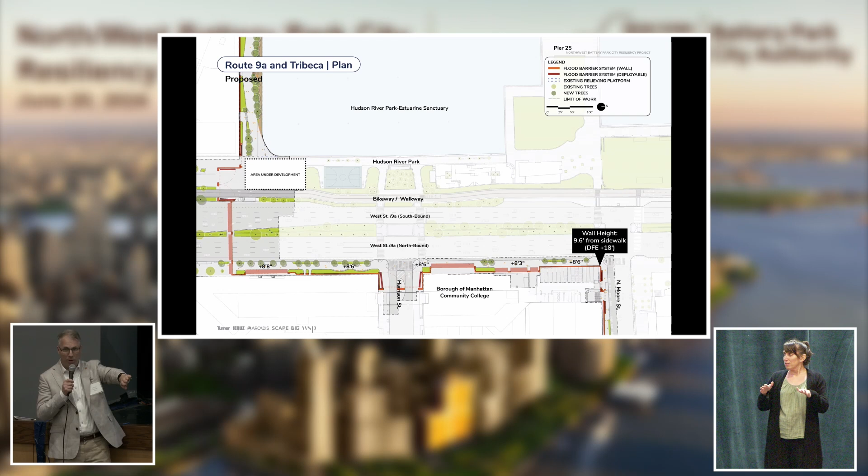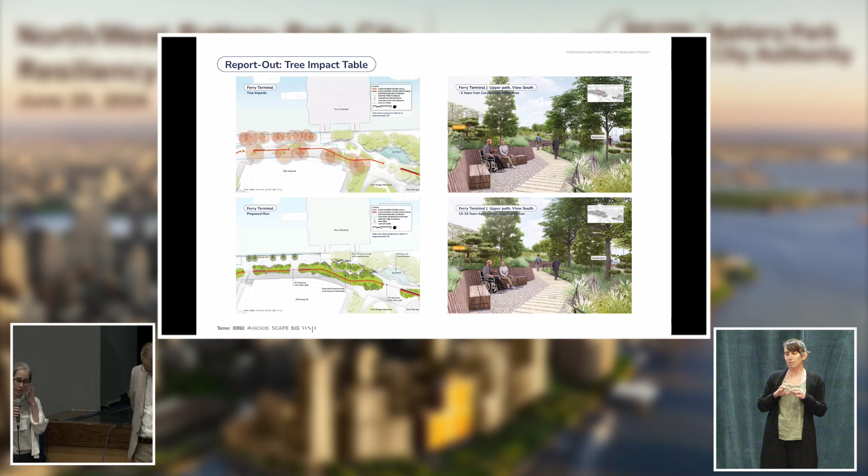For the tree question, that's actually something we're looking very closely at. One interesting takeaway from the analysis of existing conditions that BPCA did is that many of the existing trees are around the same age, which is natural given that this was constructed around the same period. From a sustainability, resilience, biodiversity perspective, that's not what you want. You want a variety of ages for planting in general, but especially for trees. So what we're looking at is how old or how big are the trees we're able to keep, and then trying to diversify with new planting.

The intent is to balance that with areas where we want to achieve greater shade cover as soon as possible, where there's going to be a lot of solar exposure. We understand it's not pleasant, especially today, and so we are looking at that. It's a bit of a balancing act between trying to create a more sustainable environment long-term and trying to achieve the shade cover that would make the space more pleasant and inviting for people to use.

Okay, I'm grateful for all of your work and care on this project. As somebody with graduate architectural training, I understand the complexity and can see how much progress you've made over the past 2 years. Two questions or requests. Number 1, please retain the urban oasis character of Pump House Park. It is one of the only havens we have in this neighborhood and is a major bird habitat. Number 2, I understand the project staging will be on the North Cove Plaza for 5 years. Is it possible to move it to the southern side of the cove, away from the residential area?

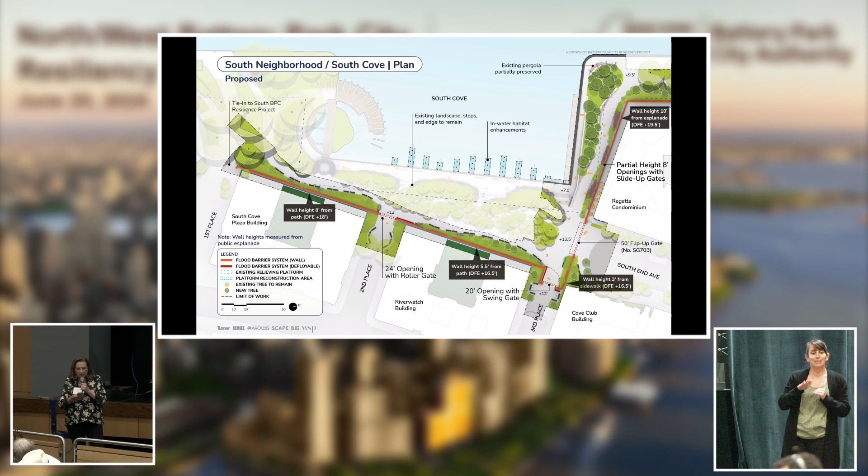Two areas of the project: the Rockefeller Park and the North neighborhood. Well, Rockefeller Park is in lockstep with the rest of the design as it's progressing forward. We're right now approaching the 60% design milestone with the authority, and Rockefeller Park is as detailed as the rest of the project elements.

So, the visuals I think are representing that. I'm not sure when they mean the north area. I believe that might just be Reach 2. Reach 1 and Reach 2 are of consistent design detail as the rest of the project. The only part of the project that lags design detail is around the pump station, because the project needed to do certain analyses up front to understand where a pump station would be located and how large it would need to be. Once those two pieces of information were known, the pump station design began. That's why there's a lag between the base project, which is the alignments, and the pump station component.

Thank you. Caroline.

Hi, thanks. I want to start by saying I appreciate the incorporation of some of the vitriolic feedback you've heard before about elements and design, so I want to acknowledge that. But I have three questions. One is, along those lines, thank you for putting in the World's Fair style benches, because I think one of the hallmarks of Battery Park City, both north and south, is the hat tip to the Olmsted and New York style historical parks. So my question is, is that going to continue in the elements so we can conserve and retain as much of the beauty of Battery Park City, as opposed to the deviations from park design we've seen in the rest of the city? I know most of my neighbors I talk to do not want a look and feel reminiscent of the rest of New York City parks. They like it the way it is, and I think a lot of that's just optionality. So the further we could be retaining that, the better off. So that's one question—are we going to continue down that road?

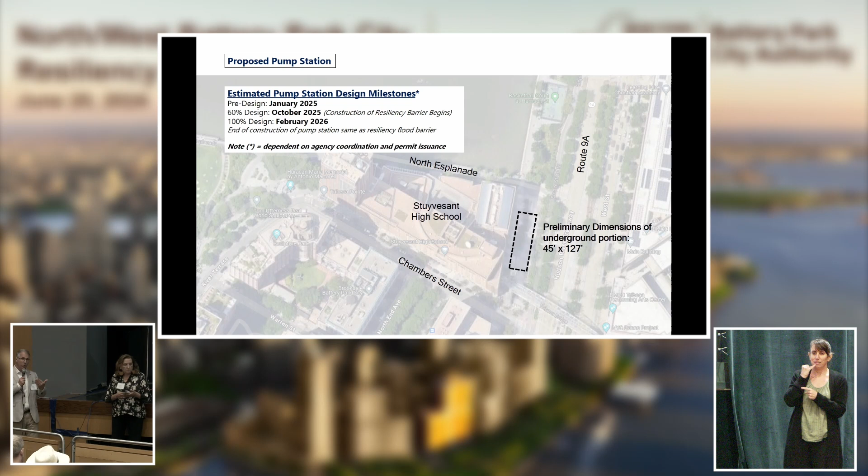The second purpose of the pump station is that extreme rain events, cloudbursts as we now call them, occur with a lot less notice than large hurricanes. With hurricanes, we can probably get a good idea of what's going on 4 to 5 days out. Sometimes in the summer in New York, you don't have more than 8 to 16 hours notice for a cloudburst event. So that pump station will have utility if there's extreme flooding caused by a cloudburst event, because it's far easier to activate and put online than the entirety of the flood protection system around Lower Manhattan.

Okay, one more and then we'll get to this gentleman. Where does the funding come from for the project?

So we were lucky this year that the governor and the state legislature agreed to an increase in our bonding capacity, which allows us to put out bonds in the public market to raise capital to build the project. The state legislature increased the bonding capacity from $1.5 to $2.5 billion. Those bonds are backed by property taxes and other revenue streams, which the private market believes are worthy of a AAA rating, which is what we have. So we actually have debt that's less expensive to issue than the city of New York does, because we've got a very sturdy financial footing. So that's the short answer.

Okay, would you try to limit yourself to one question, please? I want to make sure we can get to everybody. Well, I have two. Well, one, we could do two. Back up to this gentleman's response. The Battery Park City Authority, I assume, is going to issue those bonds?

Okay. Well, if it's a downtown resiliency project, why is the entire cost of the project being put on the backs of the people in Battery Park City? It's a downtown resiliency project. Those bonds are revenue bonds, and they're backed by the taxing authority that you have on the residents of Battery Park City. So why are we footing the bill for the entire downtown neighborhood? Because this will impact the financial district or FIDI, it will impact Tribeca, it will impact all the people that are not involved in the community here or that bear the brunt of the taxing authority of Battery Park City. So—

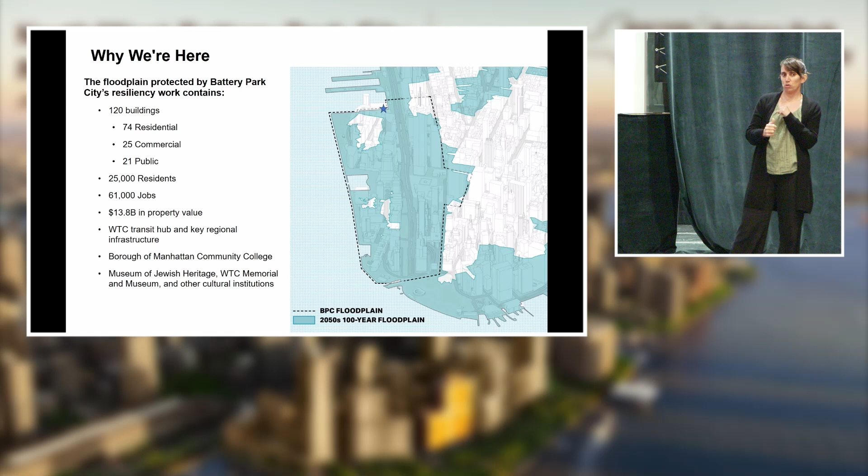What are the projections on FEMA that your team has brought up? Because we're not really in a flood zone — look up the FEMA flood map, the majority of Battery Park City is not in the worst zone. As far as the cost savings go, I sit on a board in one of the buildings here where I'm treasurer, and I'm also a licensed insurance agent, so I'm very well aware of what the insurance costs are, and the savings aren't going to be that significant — not where you've brought it up as a point twice in tonight's meeting.

All right, thank you. Caroline, could you take the mic back, please? Do one of you want to respond?

On your question, this map shows two points. One, the project we're building is designed to absolutely protect the authority's property, and there's benefit to the residential strip basically east of 9A. You all walk across 9A frequently, and you know that when you get over the highway, the topography kind of drips down a little bit — that creates a problem for those folks, and this project is a benefit to them. But it doesn't continue around the Lower Manhattan area and over to the east side of Lower Manhattan, just to clarify that.

Number two, on flood insurance — I'm not a flood insurance expert, but the country's flood insurance program is generally considered broken. If we were having this conversation in Florida, Texas, or the Mid-Atlantic, we'd probably be having a different conversation about how much flood insurance costs. We believe flood insurance rates are going to rise, and the authority believes it's a benefit to the project and its residents to not have to pay those premium flood insurance costs indefinitely, because the project will be certified. At some point, those insurance rates are going to kick in.